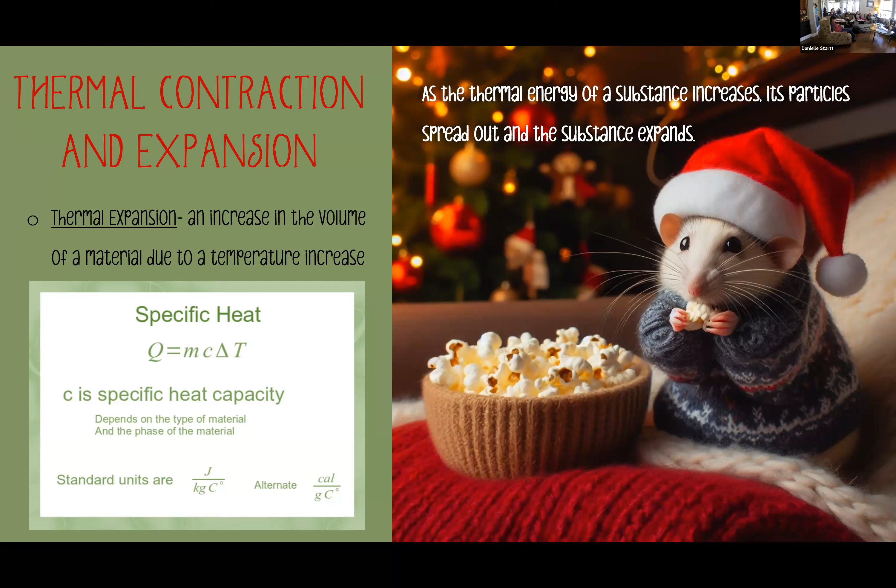So as you heat something up, it's going to spread out and expand, except water when it freezes, which expands because it's forming a crystalline structure as the molecules lock into place. Thermal expansion is an increase in the volume of material due to a temperature increase. Matter expands when heated, which is what makes the liquid in thermometers rise, which you saw today.

It's also the reason for joints in the highway. When you're driving down the interstate and your car goes over those rubber dividers in the highway, those are joints. When they make interstate pavement, they make it in sections divided with little rubber strips, because the concrete expands when it's hot and expands into the rubber instead of cracking.

Is your question whether that's why sidewalks also have divots in them? Yeah, sidewalks are divided for the same reason, also because it's easier to pour them in smaller chunks. If you've ever poured any large concrete, your driveway has sections in it too, because concrete expands and is very rigid. When concrete expands against concrete, it cracks, and we don't want our interstates to crack because they cost billions of dollars. So one way we prevent that is with these little rubbery joints.

Thermal expansion is also used in, what is he standing next to? Not thermometers—what's this thing called on the wall? A thermostat.

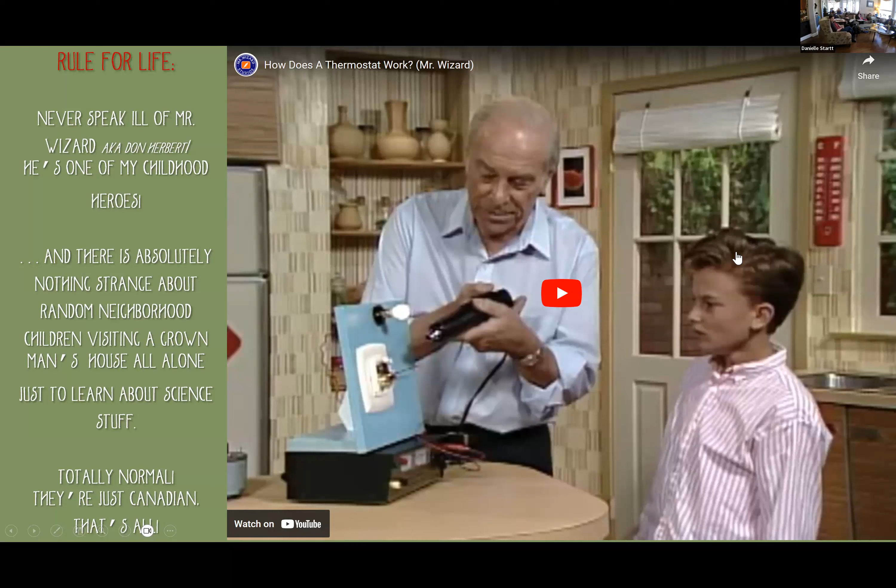So we will watch Mr. Wizard and this random neighborhood child. If I have the full series on DVD, if you ever want to borrow it, it's awesome, but you can watch them on YouTube. I'll tell you what, this is legit how it worked—it wasn't like y'all come over and do science, it was like some random kid hanging out with Mr. Wizard, and he goes, let me show you how this works, does a science experiment, and they go wow, and they go home, and there are different random kids there next week. Totally normal, it was the early 80s, you could get away with this. Okay, so he is going to show us how a thermostat works, and it's really quite cool.

You would recognize this, I assume, right? Yeah, it's a thermostat that you put in your house to measure the temperature and the heat—it not only measures it, because there's a little thermometer in here, but it actually turns the furnace on and off, right? Yeah. Well, you and I are going to investigate what goes inside there, and it's based on the idea of a bimetal strip. Bimetal, meaning—you know what 'bi' means? It means two, right, two metals. In fact, here are two metals right in front of you—there are two wires made of metal, and I'm going to send electric current through them to heat them up. Okay, heat it up and sight right across those wires on top there, and watch what happens when we heat up the two different metals.

What's that? The one in the front is sinking down, making that go down. Now watch, I'm gonna turn off the current.

Go back up again? Yeah, right back up to the same level. As it cools off, it'll go back up to the same height as the other. In other words, what I did this for was to show you that metals expand, but different metals expand at different rates. Obviously, the one on the front expanded the most.

Okay, now let's assume I'm right over here, and light the candle. Let's assume that we take two metals and put them together to form one strip, which is what this is. And light the candle.

All right, so when we're dealing with temperature, we measure it with different scales, and each scale has a purpose. They're not all the same, and they have obvious differences. So what do we use mostly here? Fahrenheit. And what do we use in science? Celsius. Now, Kelvin is used a lot.

Bye, have a safe trip. Oh, sorry. Later.

Kelvin is used a lot in physics, and that's because of the zero. Yes, the ideal gas law. Very good. So Fahrenheit is used most commonly in the US. Water freezes at 32 and boils at 212.

Those are numbers everybody can remember, right? No. What? Celsius is nice and easy: 100, 0, everything in between is a nice even divide, right? And then you get Kelvin, which is used a lot in physics. Water freezes at 273.15 and boils at 373.15. But Kelvin has a difference.

0 Kelvin is theoretical, and it's where all particles stop moving. So think back to the definition of temperature being the average of the kinetic energy of all the particles within a substance, okay?

What happens at 0 Kelvin as all the particles stop moving, right? But if you can get to 0 Kelvin, if it's the average kinetic energy, then you're saying there is no more kinetic energy. It's gone because there's no motion, right? But that's impossible because you can't create or destroy energy. So that's where you get yourself into those little things. So it's a theoretical thing.

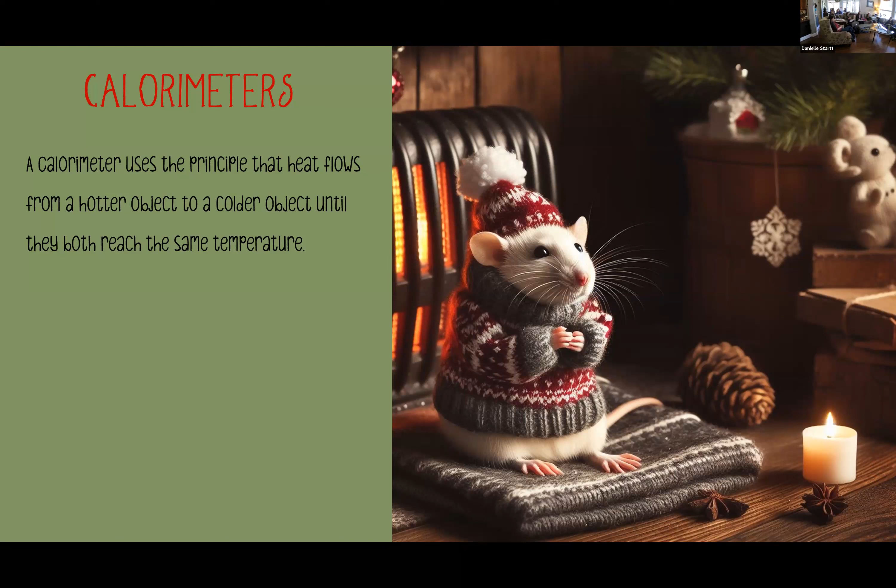So they can estimate, depending on external environmental factors, how long somebody's been dead. And we use this to heat up all kinds of materials, and everything is just kind of a given thing. We think of it as a given thing, but it's actually a thermodynamic law.

So heat and thermodynamics, this looks like where you want to spend your morning with a cup of hot chocolate. I want to stay there. Heck yes. So thermal energy and states of matter. I did this one just for you.

So all matter on Earth exists in 3 states that we know of: solid, liquid, gas, and then plasma being a 4th state that's not stable to exist typically here. We don't see plasma in our day-to-day life, but we do see solid, liquid, gas, right?

So physical change from one state to another is called a what? This is an easy one. What you got, Yusuf? Change of state. Yep, sometimes you'll hear phase, but yeah, change of state.

So matter will change from one state to another if thermal energy is absorbed or released. Okay, picture an ice cube in your hand. As you hold the ice cube, what's gonna happen to it? It's gonna melt. Okay, why is it melting?

This is the heat from your hand. Okay, so the heat from your hand, we know that heat flows from warmer to cooler. So the heat is leaving your hand, and how is your hand feeling? Cold. The heat is leaving your hand, it's going to the ice cube. What's the ice cube doing, absorbing or releasing thermal energy? Absorbing thermal energy, right? Because it's absorbing the thermal energy, it is changing state from solid to liquid.

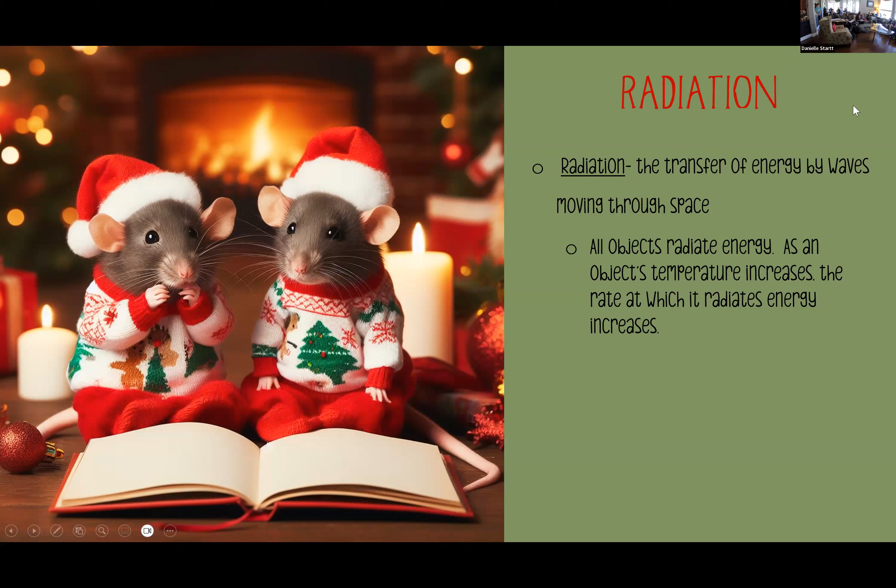So if you ever look over a fire or anything hot and see the air above it gets distorted, all wiggly, you can actually see the effect of the waves on that gas. The light is getting distorted as it passes through due to the change in density for those different areas of heat waves. So that's where you get radiation.

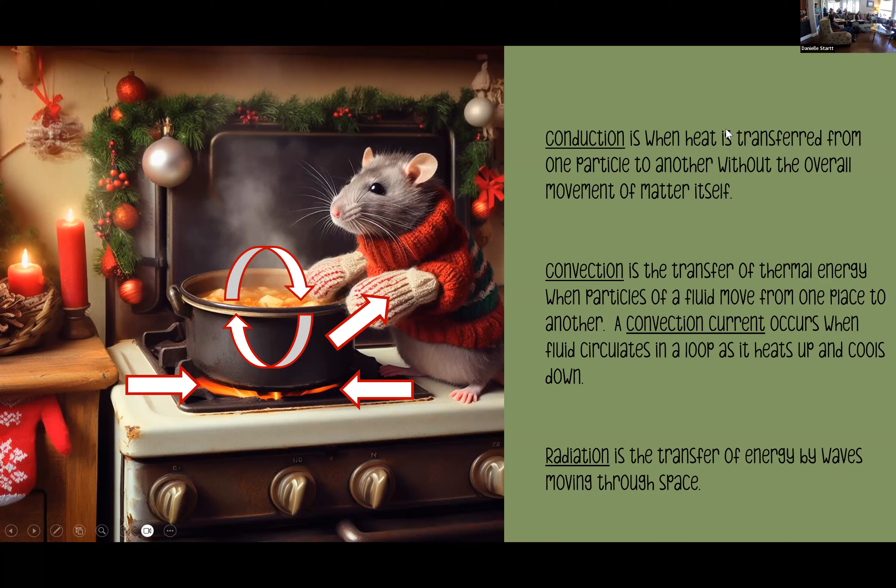All right, so thermodynamics. This is one of those things juniors will not know jack about, and they'll look at you like you're crazy. So we have the study of conversions between thermal energy and other forms of energy, and we call it... Colin?

We call it thermodynamics. This is nerdy stuff. If you want to really get into thermodynamics, there are people who spend their lives on this and talk about getting into your geek. This is the way to do it.

So what's the first law of thermodynamics say? Energy is conserved. This goes back to just a minute ago, we talked about conduction, and we said that you're passing the thermal energy from one particle to another, but you're not losing it, you're just passing it along.

What's the second law state? The energy can't flow from cold objects to hot - colder to hotter. And it's done. It only works on the system you're in. You always have to remember you're talking about the system you're in.

Now what's this last one? Third law of thermodynamics. We talked about that, right? Absolute zero can't be reached because that would mean what happened? You can't destroy energy, because energy's got to go somewhere. You can't make it go away. So it's a theoretical thing.

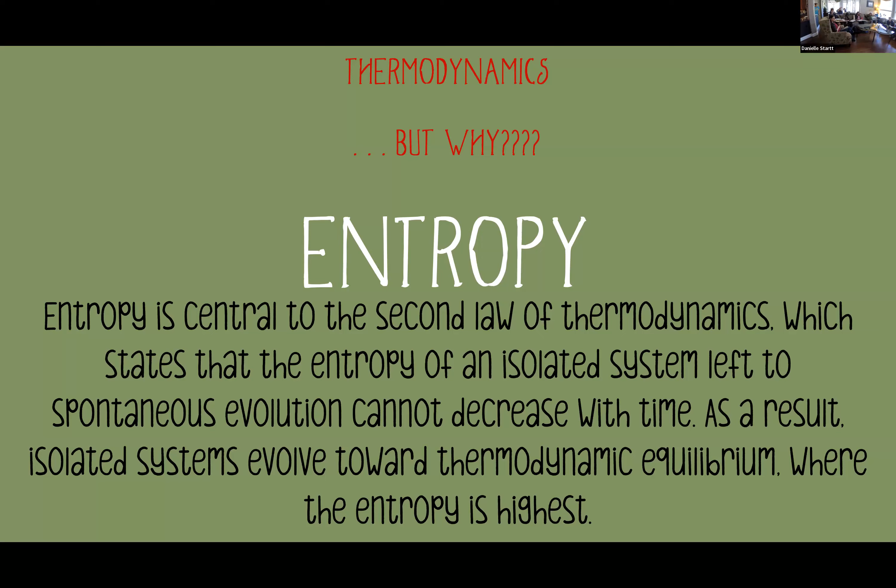Okay, here's entropy and why entropy is useful.

There's a concept that's crucial to chemistry and physics. It helps explain why physical processes go one way and not the other - why ice melts, why cream spreads in coffee, why air leaks out of a punctured tire. It's entropy, and it's notoriously difficult to wrap our heads around.

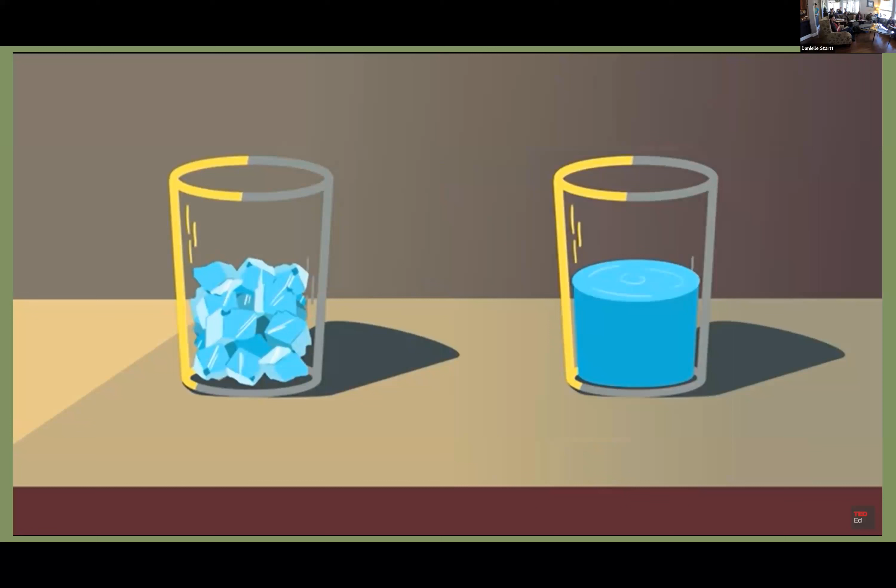Entropy is often described as a measurement of disorder. That's a convenient image, but it's unfortunately misleading. For example, which is more disordered, a cup of crushed ice or a glass of room temperature water? Most people would say the ice, but that actually has lower entropy.

So here's another way of thinking about it, through probability. This may be trickier to understand, but take the time to internalize it, and you'll have a much better understanding of entropy. Consider two small solids, which are comprised of 6 atomic bonds each. In this model, the energy in each solid is stored in the bonds. Those can be thought of as simple containers, which can hold indivisible units of energy, known as quanta. The more energy a solid has, the hotter it is.

It turns out that there are numerous ways that the energy can be distributed in the two solids and still have the same total energy in each. Each of these options is called a microstate. For 6 quanta of energy in solid A and 2 in solid B, there are 9,702 microstates.

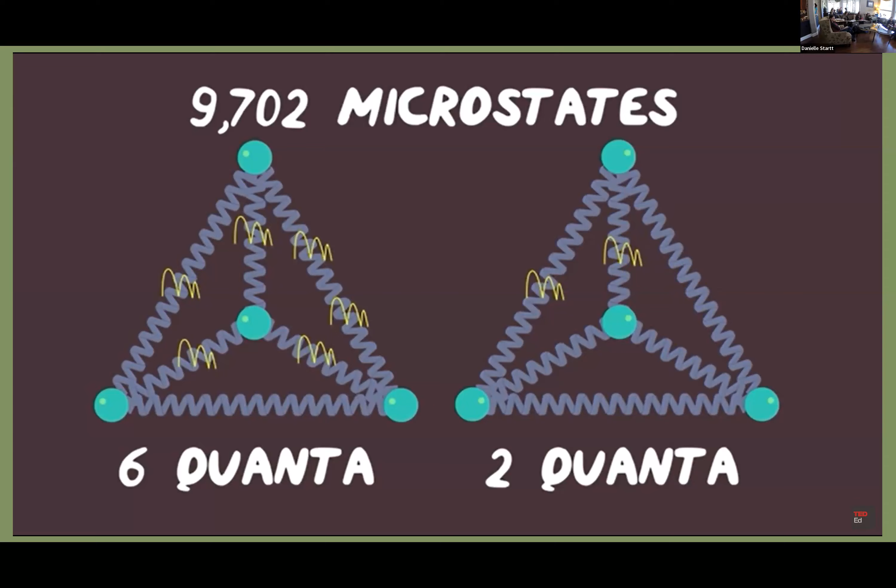Of course, there are other ways our 8 quanta of energy can be arranged. For example, all of the energy could be in solid A and none in B, or half in A and half in B. If we assume that each microstate is equally likely, we can see that some energy configurations have a higher probability of occurring than others.

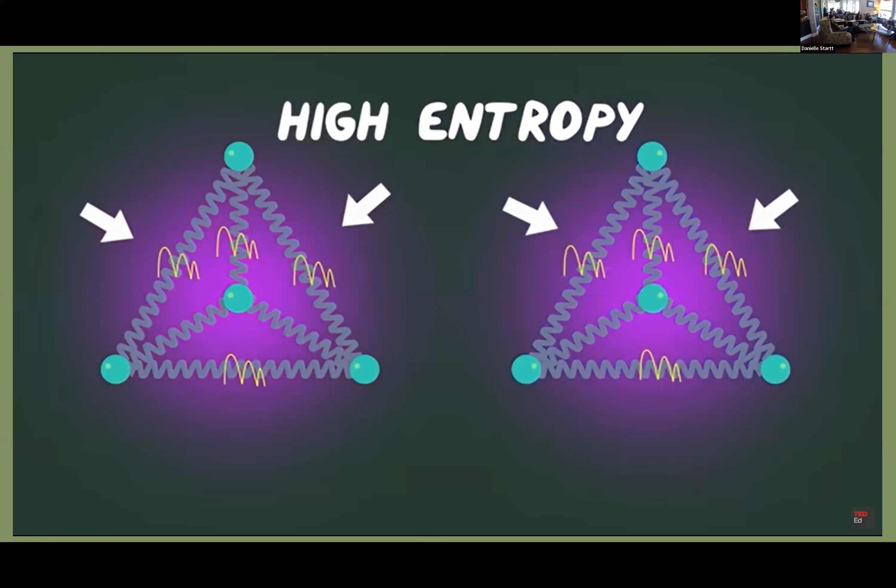That's due to their greater number of microstates. Entropy is a direct measure of each energy configuration's probability. What we see is that the energy configuration in which the energy is most spread out between the solids has the highest entropy. So in a general sense, entropy can be thought of as a measurement of this energy spread. Low entropy means the energy is concentrated. High entropy means it's spread out.

To see why entropy is useful for explaining spontaneous processes like hot objects cooling down, we need to look at a dynamic system where the energy moves. In reality, energy doesn't stay put. It continuously moves between neighboring bonds. As the energy moves, the energy configuration can change.

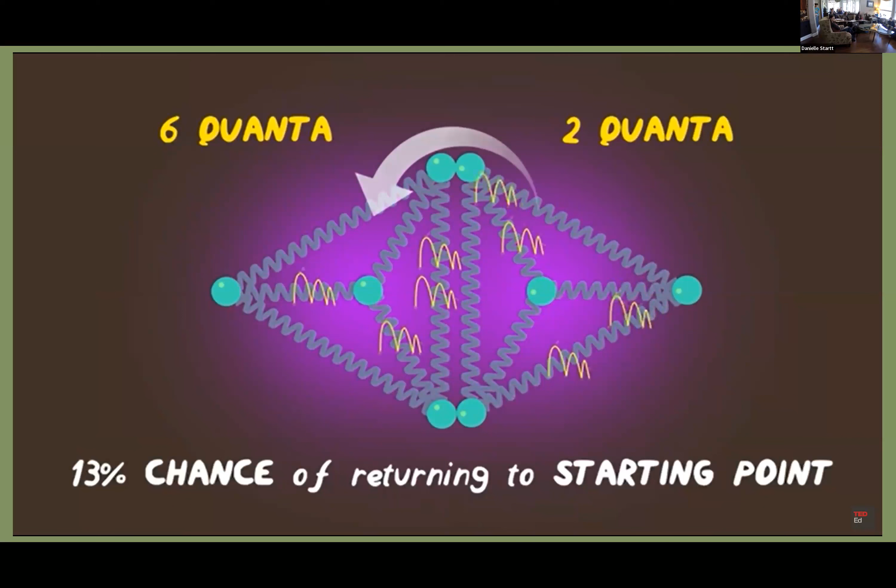Because of the distribution of microstates, there's a 21% chance that the system will later be in the configuration in which the energy is maximally spread out. There's a 13% chance that it'll return to its starting point, and an 8% chance that A will actually gain energy. Again, we see that because there are more ways to have dispersed energy and high entropy than concentrated energy, the energy tends to spread out.

That's why if you put a hot object next to a cold one, the cold one will warm up and the hot one will cool down. But even in that example, there is an 8% chance that the hot object would get hotter. Why doesn't this ever happen in real life?

It's all about the size of the system. Our hypothetical solids only had 6 bonds each. Let's scale the solids up to 6,000 bonds and 8,000 units of energy, and again start the system with 3/4 of the energy in A and 1/4 in B. Now we find that the chance of A spontaneously acquiring more energy is this tiny number. Familiar everyday objects have many, many times more particles than this. The chance of a hot object in the real world getting hotter is so absurdly small, it just never happens.

Ice melts, cream mixes in, and tires deflate because these states have more dispersed energy than the originals. There's no mysterious force nudging the system towards higher entropy. It's just that higher entropy is always statistically more likely. That's why entropy has been called time's arrow. If energy has the opportunity to spread out, it will.

It would just explode, I don't know. I think you got superpowers for a moment. My brain hurts. Okay, so you kind of got that idea. You won't be able to learn anything else. Energy likes to evenly spread itself. Okay, but yeah, there's a nice chance that someone watching this, objects could explode or get even hotter. Infinitesimally small chance, yeah. So if you're ever sitting around and that happens, I expect the aliens have arrived or something, because that's not a good sign. So yeah, not a good sign, Armageddon. So you kind of got it, but you don't have it, because there's also, of course, a what if, a but wait. There's a but wait with entropy.

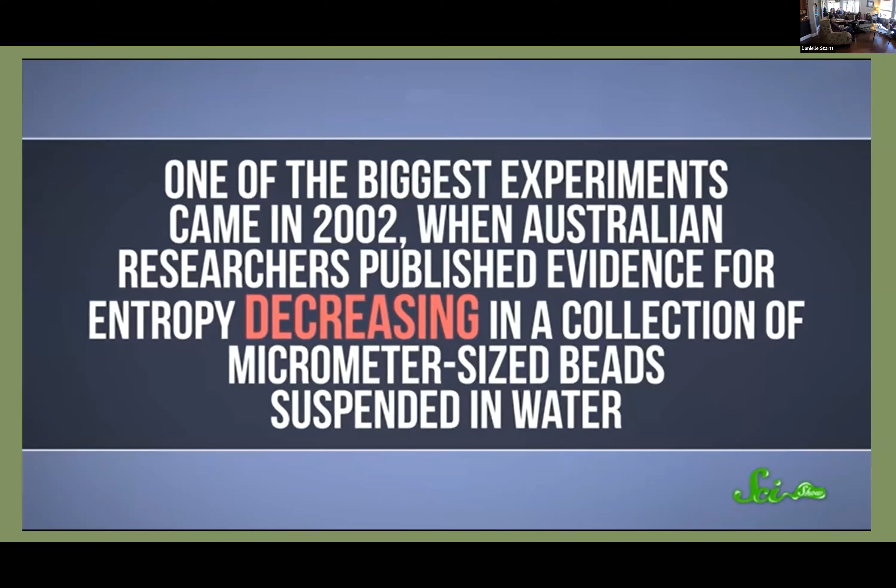One of the biggest experiments came in 2002, when Australian researchers published evidence for entropy decreasing in a collection of micrometer-sized beads suspended in water. The random thermal jiggling of water molecules was constantly pushing the beads around, and for the most part, as expected, the beads were moved randomly. But then the researchers looked harder, and found that sometimes, by pure chance, the beads were pushed in a specific direction, causing them to noticeably speed up. In other words, the beads were turning the disordered random heat energy of water into ordered kinetic energy that can do work. And it was all for free. This effect only persisted for a few tenths of a second, but it proves that on a small scale, you can cheat the system, at least briefly.

This wasn't the only paper to investigate this idea either. There was another in 2005 that suggested these effects might be present in photosynthesis, and a few more from 2013 and 2016 that explored how this might apply on the quantum level. So it's something researchers are actively exploring. While this might sound like a random technical detail, these studies are actually really significant, because as nanotechnology continues to develop, we're going to be building things like engines and transistors on these smaller and smaller scales.

Realistically, this loophole in the second law doesn't mean we'll be able to make a bunch of tiny 100% efficient engines or anything, but it does mean they might sometimes pick up energy from their environment, or their molecules might move differently than expected. And that's definitely important for us to know. The rules developed back in the 1800s will have to be rethought to control things at these tiny scales. Otherwise, we might be in for some surprises.

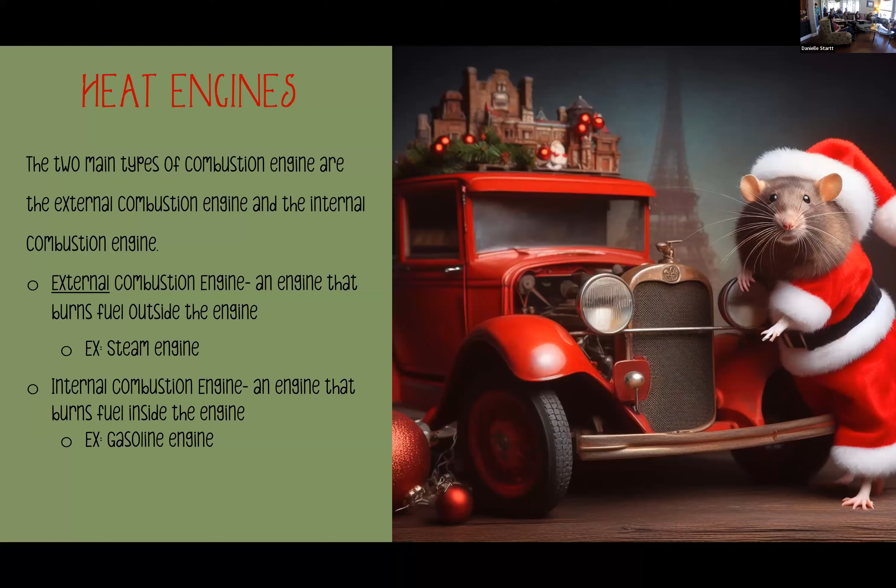We're going to do a little demo on internal combustion engines at the end of this, and it'll be a fun way to wrap up the semester because it's kind of cool. This is what you're dealing with in vehicles on the road today. That's what you put the gasoline in, and it functions inside the cylinder. We'll come back to that in a few minutes. But let's look at this.

So what do you call a system in a house that heats many rooms from a central location? Air conditioning cools it off, and this heats it up. Furnace is what heats it up? Central heating. Okay, that's what we're looking for.

So most of you probably have forced air in your house. Do you have vents? You turn the thermostat and it blows. Okay, that's forced air, that's what most of us have. Some houses, older houses, usually from the 30s, 40s, 50s, 60s, tend to have baseboard heat.

Anybody ever get in a car with your mom or dad, or even yourself if you're driving now, and it's frosty outside, and they turn on the rear defrosters, and there are those tiny lines that run through the glass and suddenly the frost disappears? Those are wires with a tiny amount of heat, just enough to get it above freezing, otherwise you crack it. Yeah, barely, just a little bit of heat.

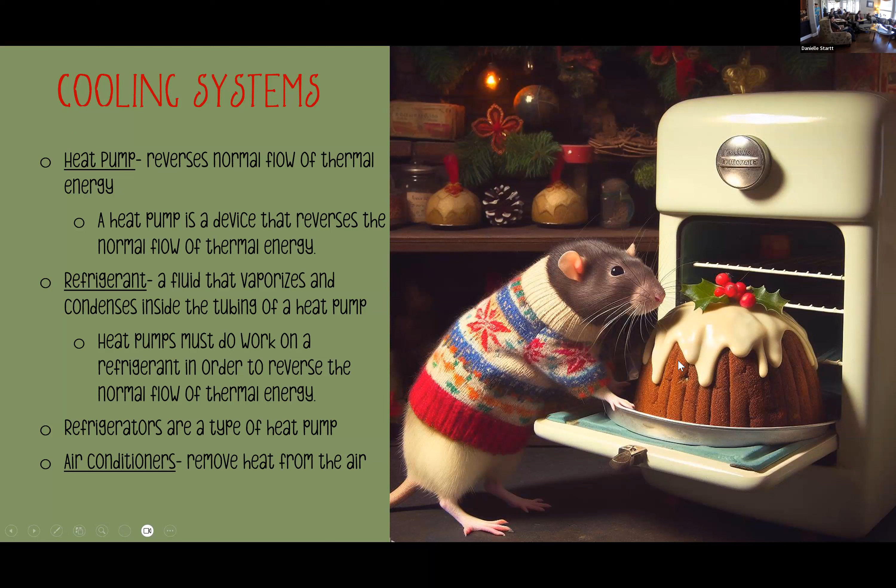Yes, you operate that oven? Don't know. Yes. Is he really planning to eat all of that? Yes, it's a fridge. All right.

Now I'm going to show you these, and then we're going to go outside and do our little experiment. But these are your topics for your Unit 4 and 5 tests.

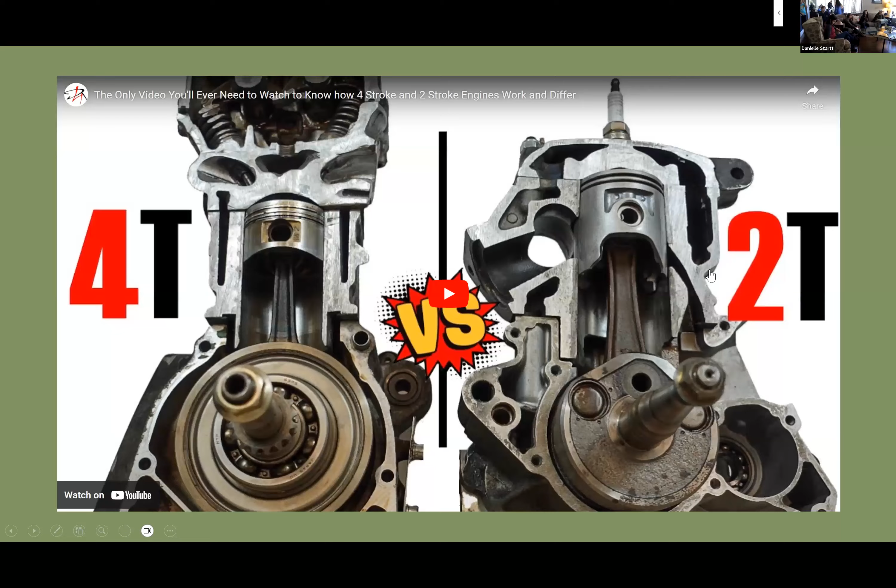Stop acting crazy, wait - buffer. What is the deal? Let me do this, I'll put it straight into YouTube so it doesn't get stupid for me like that. There, that's convection for you by the way - that's video Jason gets of the river in the mornings, it's pretty cool, it's kind of mesmerizing.

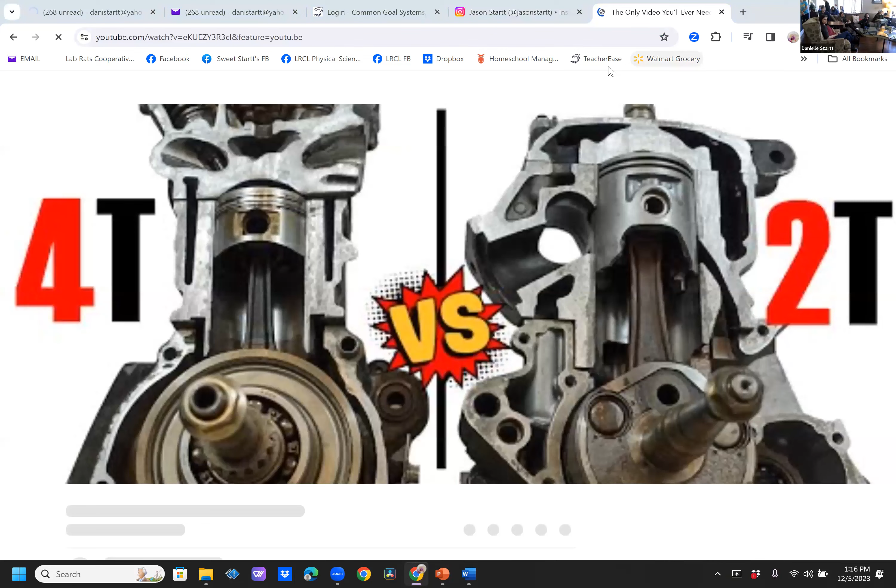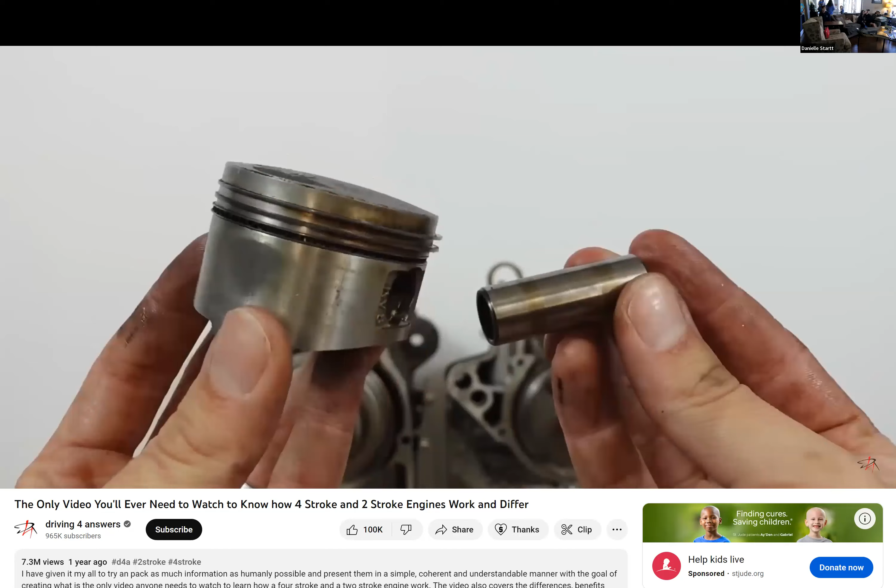All right, there we go - here we have a 4-stroke engine, and here we have a 2-stroke engine. At first glance they seem very simple - they both have a crank, a conrod, as well as a piston, and they both have a cylinder. They both operate by converting the reciprocation of the piston into the rotation of the crankshaft, which then turns the gears of the transmission and ultimately the wheels of the vehicle. But beyond these core similarities, the 4-stroke and the 2-stroke start to fundamentally diverge, resulting in two very different approaches to internal combustion.

What I'm going to do today is give you the only video you need to watch to get a very solid understanding of how a 4-stroke and a 2-stroke engine work. We'll also be exploring the differences, benefits, and drawbacks of each engine type, and this will answer the question of why the 4-stroke ultimately prevailed over the 2-stroke in most applications, despite being larger, heavier, more expensive, and more complex. So let's get started with the 4-stroke.

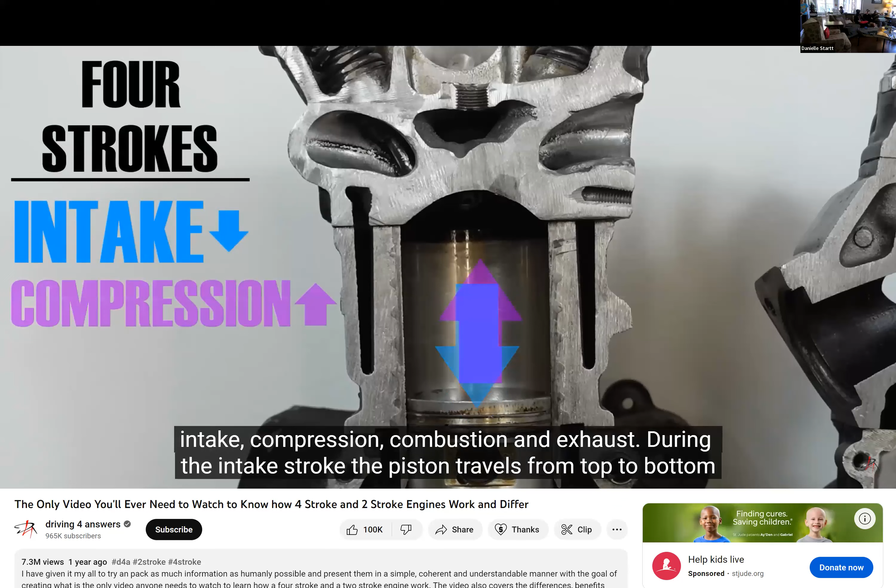Why is it called a 4-stroke? It's because the 4-stroke engine needs 4 strokes to complete one combustion cycle. Every time the piston moves from top to bottom, or vice versa, that's 1 stroke - equal to 180 degrees of crankshaft rotation. The 4 strokes are intake, compression, combustion, and exhaust. During the intake stroke, the piston travels from top dead center to bottom dead center, creating an empty space or vacuum inside the cylinder - a brief absence of air.

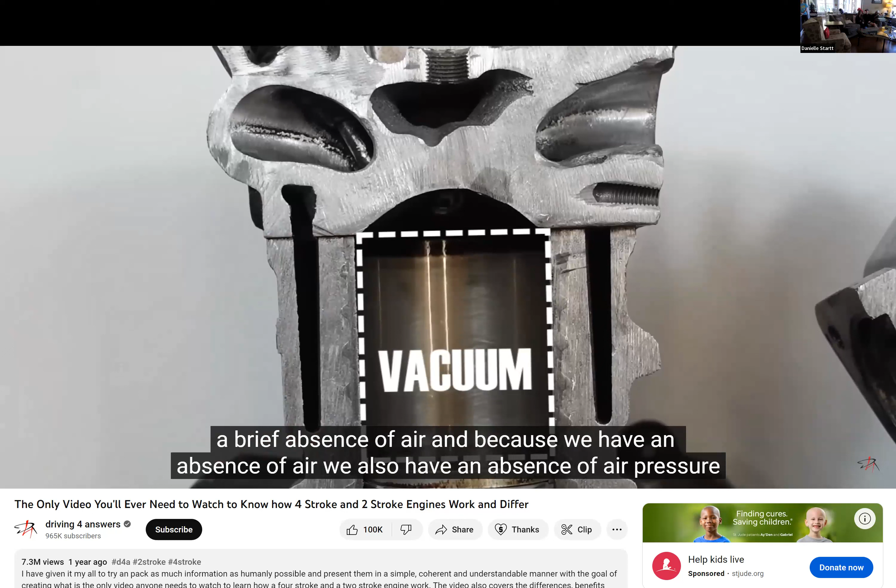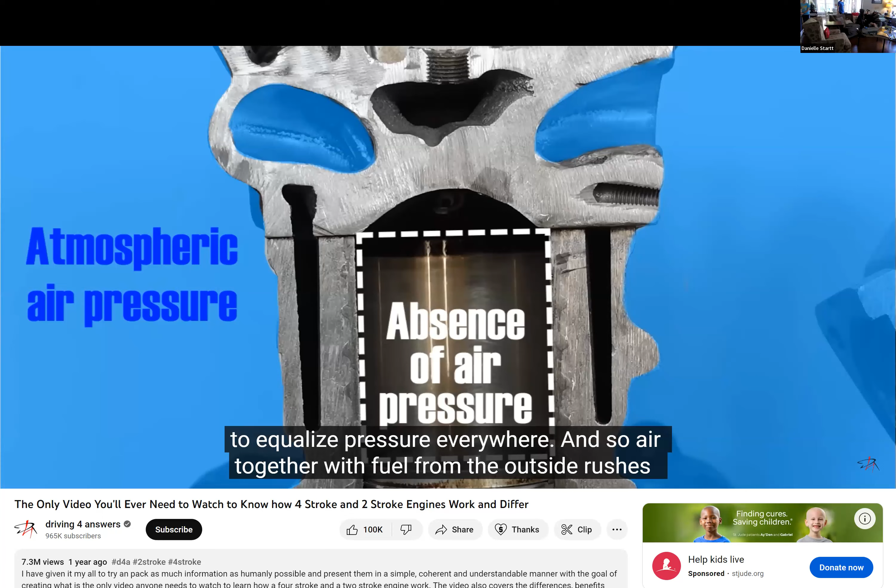Because we have an absence of air, we also have an absence of air pressure. In other words, we have low air pressure inside the cylinder and atmospheric air pressure outside the cylinder. This pressure difference cannot continue to exist, and air naturally seeks to equalize pressure everywhere. So air, together with fuel from the outside, rushes into the cylinder and fills it with a fresh air-fuel mixture. By the time the piston reaches bottom dead center, all the air and fuel that can get in have done so, and the piston now starts to move upward.

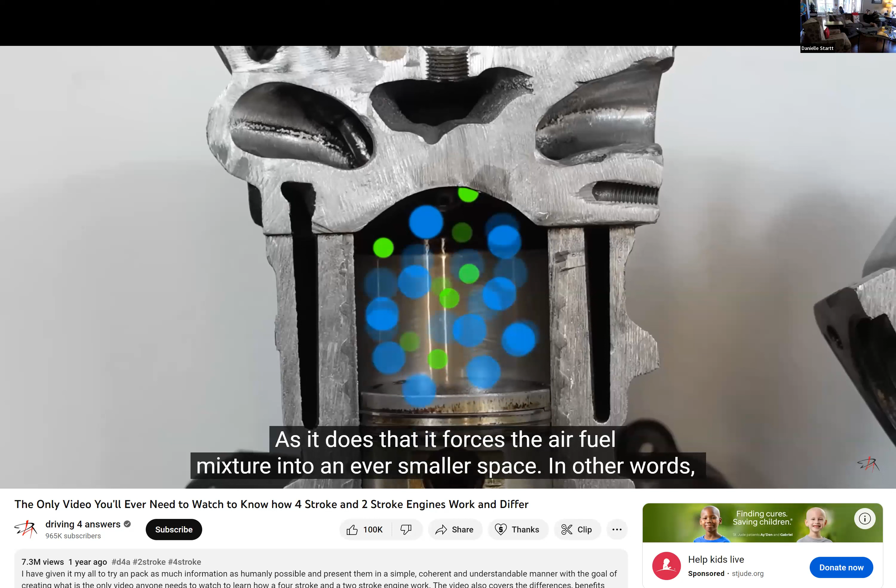As it does that, it forces the air-fuel mixture into an ever smaller space. In other words, it's compressing the air-fuel mixture, which is why this stroke is called the compression stroke. Just before the piston reaches top dead center, the spark plug fires and ignites the air-fuel mixture, which finds itself between the two electrodes of the plug.

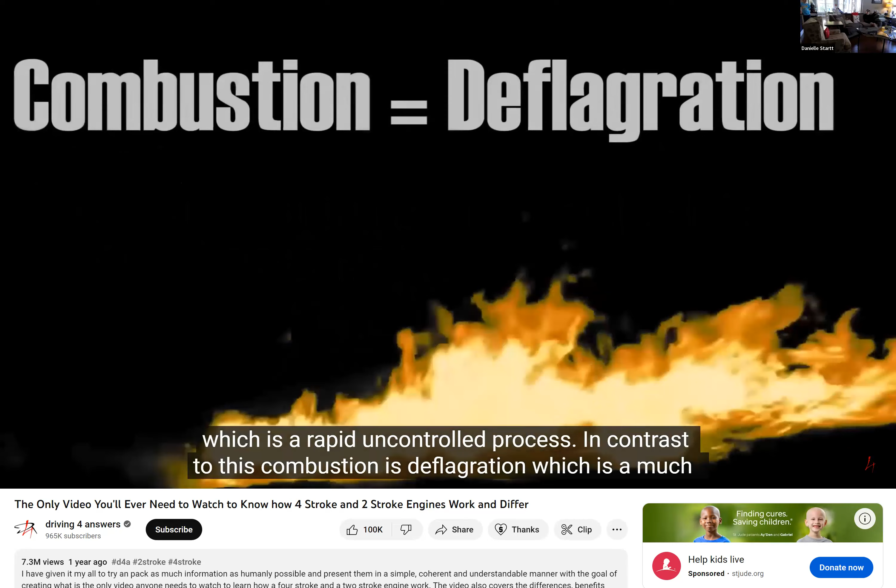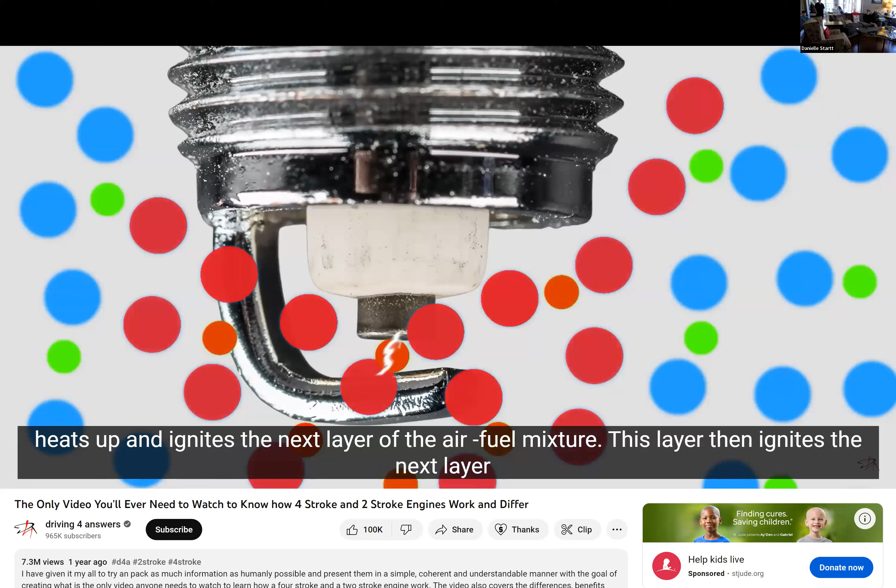Although combustion inside an engine is often described as a bang or explosion, that isn't what's actually happening. An explosion is detonation, which is a rapid, uncontrolled process. In contrast, combustion is deflagration, a much slower, more even, and controlled process. Combustion spreads out evenly outward from the spark plug through heat transfer. The small portion of air-fuel mixture initially ignited by the spark plug heats up and ignites the next layer of the air-fuel mixture. This layer then ignites the next layer, and the process continues until all the air-fuel mixture is burned. As the combustion flame front spreads, it rapidly raises the temperature and pressure inside the cylinder.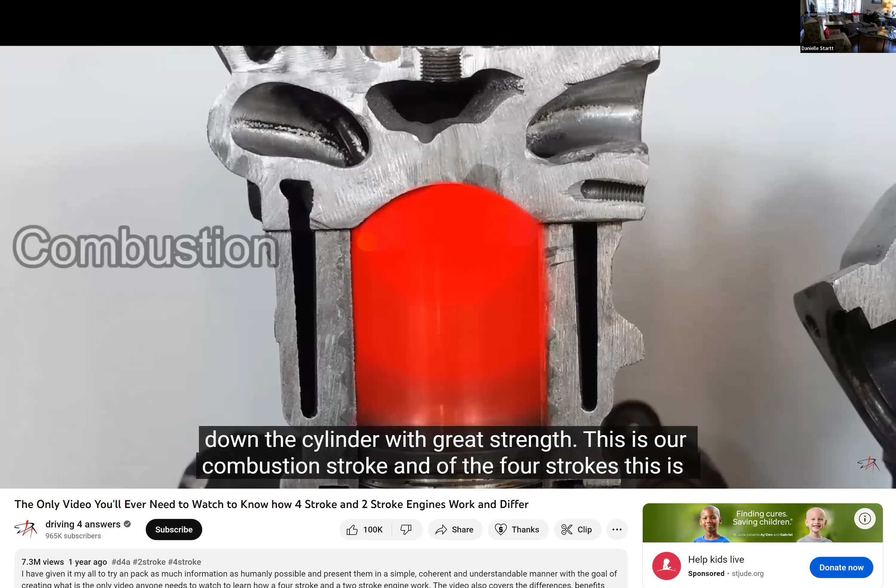Because the cylinder is sealed, this pressure has nowhere else to go, so it ends up pushing the piston down the cylinder with great strength. This is our combustion stroke, and of the 4 strokes, this is the only one that actually generates power. It does so by converting the energy released by combustion into motion of the piston, which then turns the crankshaft and ultimately the wheels.

By the time the piston reaches bottom dead center again, all the air-fuel mixture has been burned, and we now have exhaust gas, or the remains of combustion, inside the cylinder. As the piston moves up once again, the exhaust gases will leave the cylinder and exit through the exhaust piping, catalytic converters, and mufflers out into the atmosphere.

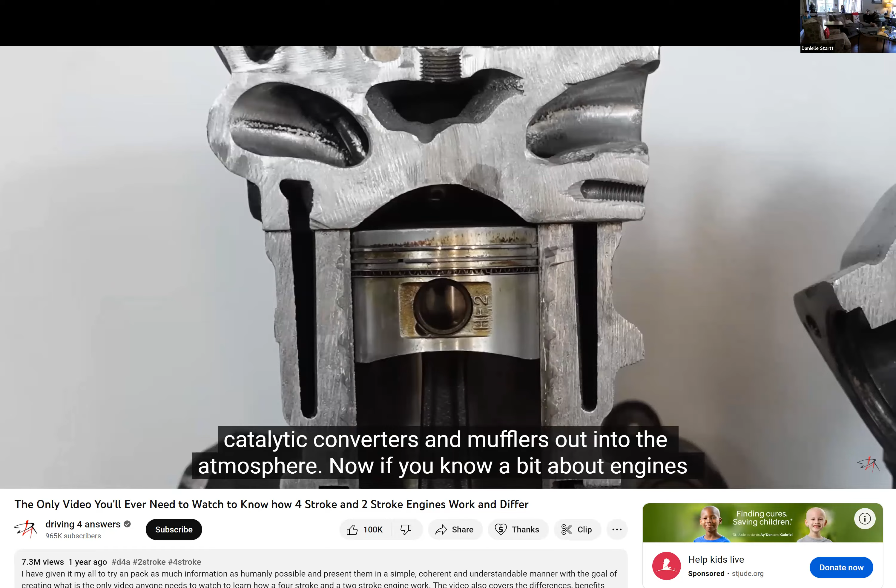Now, if you know a bit about engines, you've probably noticed how my explanation of the 4-stroke combustion cycle fails to answer some very important questions. These are: how do we allow air and fuel to get in during intake? How do we keep air and fuel, as well as combustion energy, from escaping during compression and combustion? And how do we allow exhaust gases out? Well, the answer to all of this is the same thing, and it's valves.

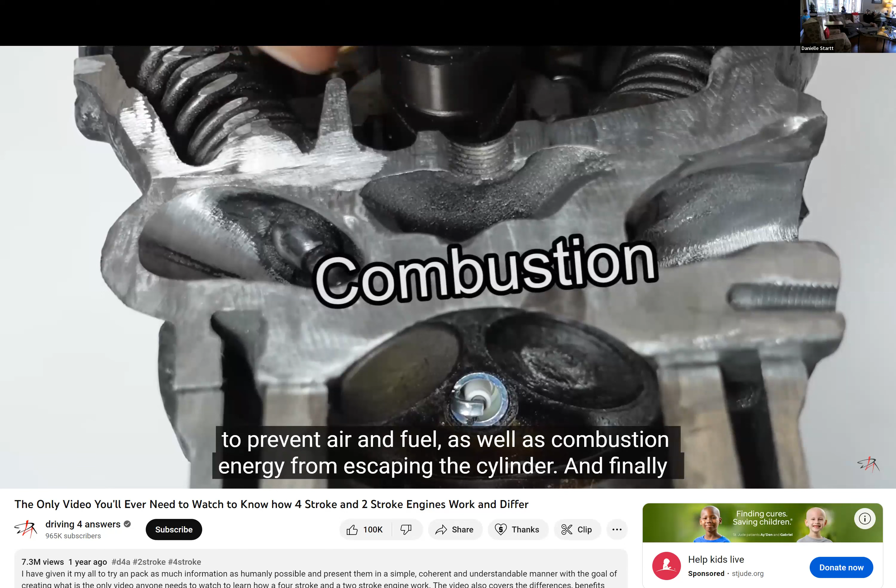The intake valve opens during the intake stroke to allow air and fuel into the cylinder. Both valves are closed during the compression and combustion strokes to prevent air and fuel, as well as combustion energy, from escaping the cylinder. And finally, the exhaust valve opens during the exhaust stroke to allow exhaust gases to escape the cylinder.

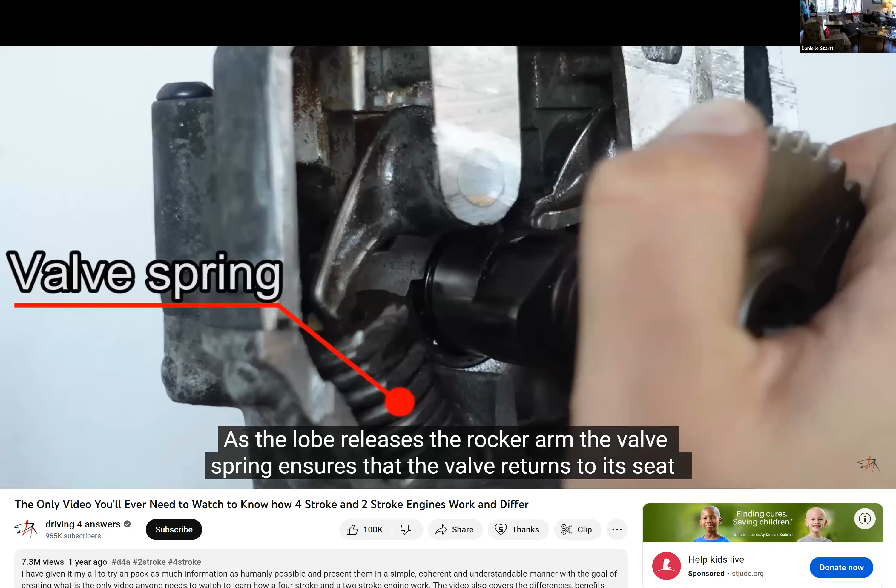Now, the valves are operated by the camshaft, and as you can see, the camshaft has lobes on it. As the lobe contacts the rocker arm, it pushes onto the valve and opens it. As the lobe releases the rocker arm, the valve spring ensures that the valve returns to its seat as soon as possible. The shape of the lobe determines how much the valve opens and how long it remains open.

The higher the lobe, the more the valve opens, or the more lift we have. The broader the lobe, the longer the valve remains open, and the more duration we have. But for the engine to run well, we must ensure that the motion of the camshaft is synchronized to the motion of the crankshaft and the piston.

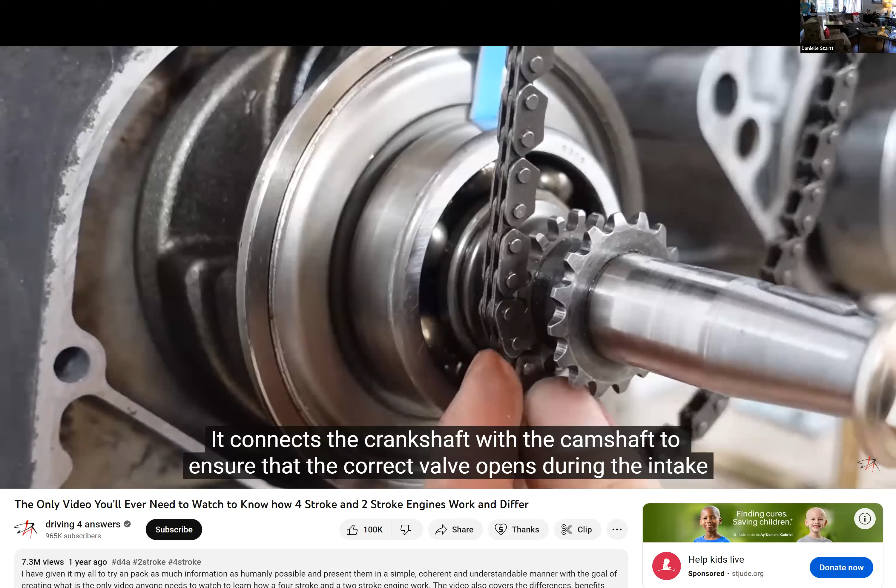This is done by a cam belt or cam chain. It connects the crankshaft with the camshaft to ensure that the correct valve opens during intake, that both remain closed during compression and combustion, and that the correct valve opens during exhaust. As you can see, our chain is very slack, and this is because our display model doesn't have a chain guide and tensioner, which are normally present to ensure proper operation of the chain.

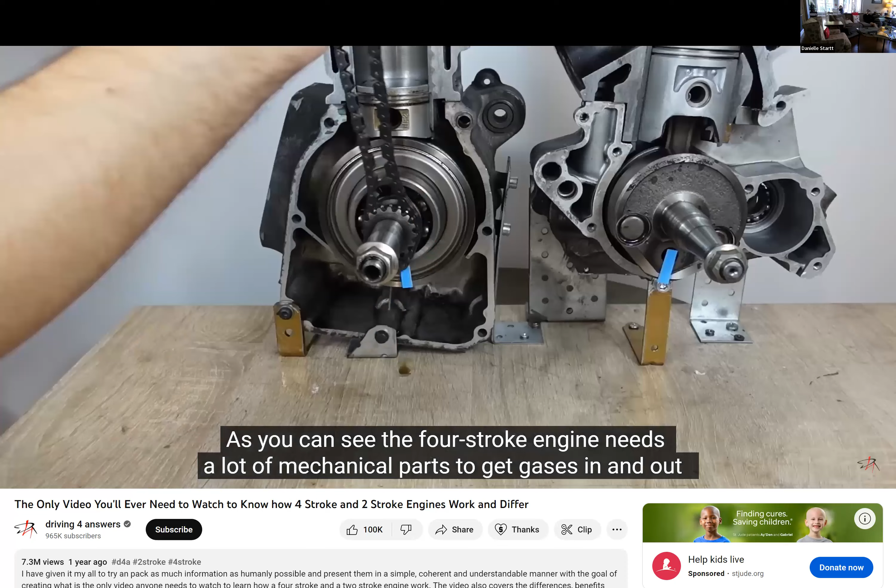As you can see, the 4-stroke engine needs a lot of mechanical parts to get gases in and out of the cylinder. These parts are a source of weight and complexity, but also of friction, and they actually have to steal some of the engine's power to operate.

I need some strength to overcome the resistance of the valve spring and open the valve. This strength must come from somewhere when the engine is running. And so the valves actually steal a bit of the energy created by combustion to open themselves and allow the next combustion to happen.

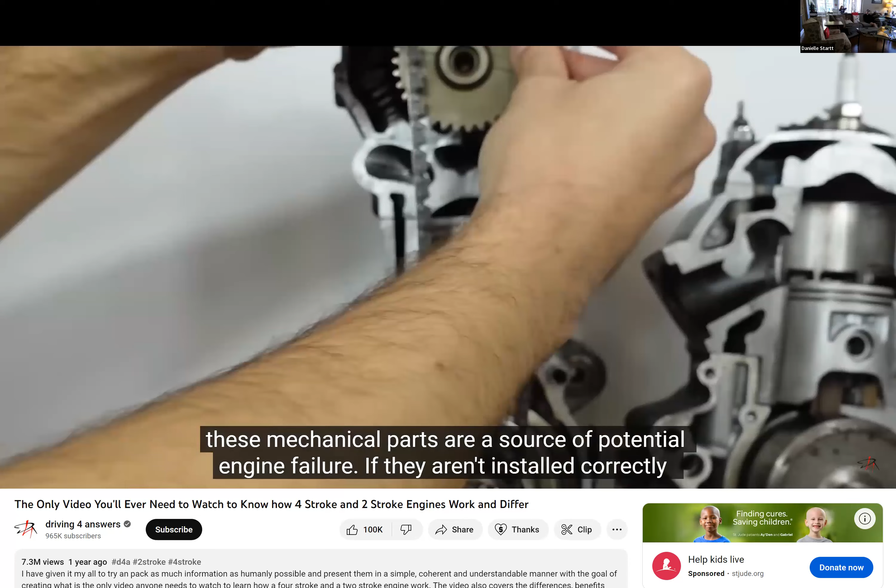Additionally, all of these mechanical parts are a source of potential engine failure. If they aren't installed correctly and the timing of the engine isn't correct, it can result in the engine running poorly. In extreme examples, the timing can be so off that it results in the piston contacting the valve on an interference engine. An interference engine is one where valves and the piston occupy the same space but at different times. This can often enable a more compact, efficient, and powerful engine, but it also leads to engine failure in the event that the chain or belt snaps.

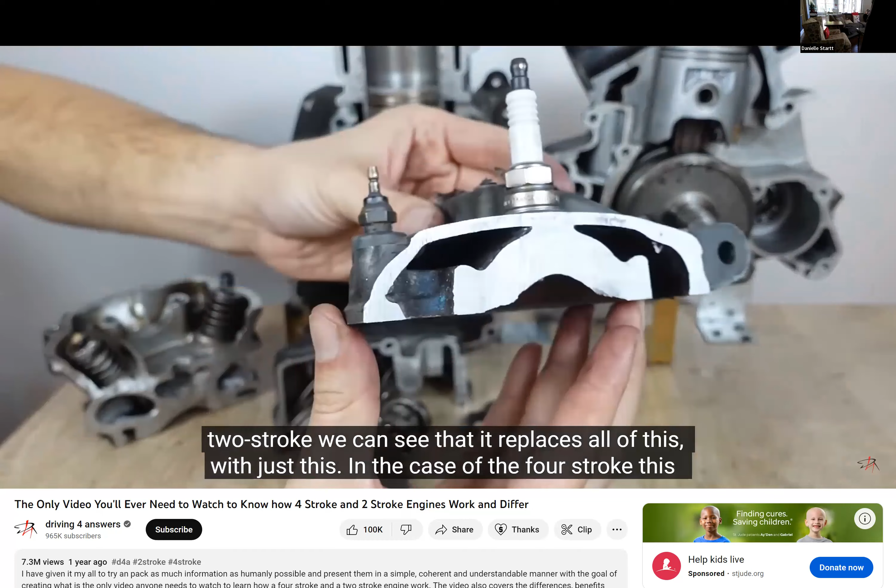Now, if we move over to two-stroke, we can see that it replaces all of this with just this. In the case of the four-stroke, this is the cylinder head together with the valve cover, whereas in the two-stroke, we really have just a cylinder cover or cap. There are zero moving parts, no valves, no chains, no cams, no springs, and therefore less weight, less complexity, less cost, and less potential for failure.

So then how does the two-stroke get gases in and out of the cylinder without valves? Well, if there's one thing you should take away from this video, it's this: the four-stroke only uses the area above the piston for the combustion cycle, whereas the two-stroke uses both the area above and below the piston. In other words, the intake charge, or air and fuel mixture, sees both the area above and below the piston in a two-stroke, whereas the intake charge never gets below the piston in a four-stroke.

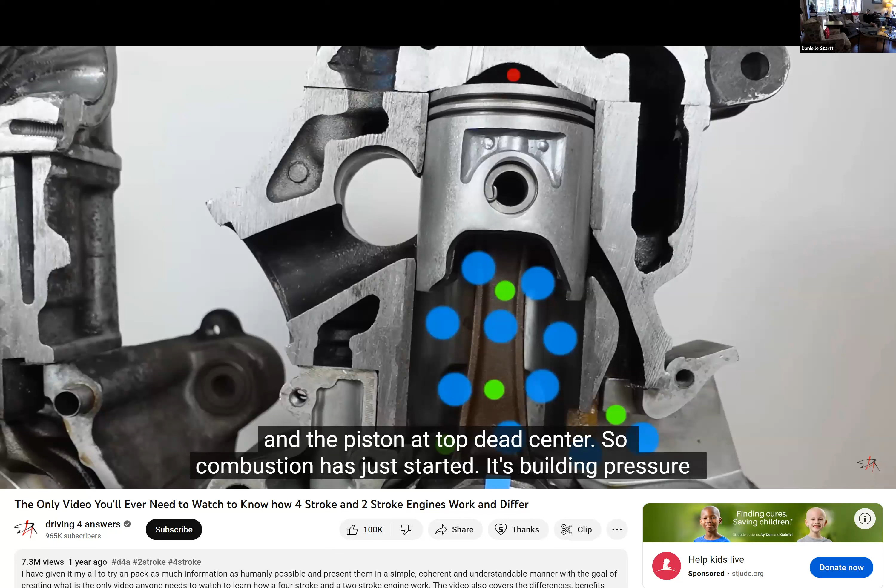Now let's observe the combustion cycle in a two-stroke. We're starting with the combustion stroke itself and the piston at top dead center. So combustion has just started. It's building pressure in the cylinder and pushing the piston down, while at the same time we have fresh air fuel mixture below the piston. I'll explain how it got there in just a moment.

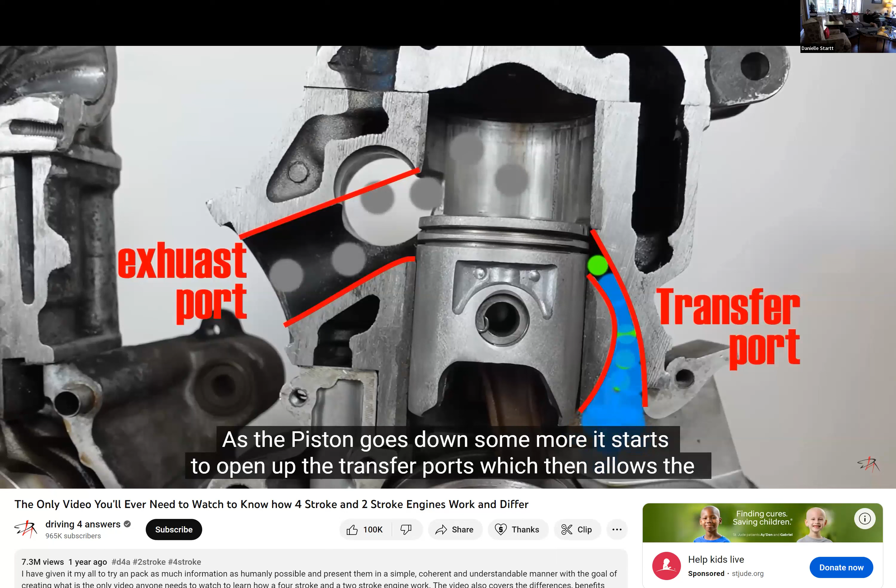Now, as the piston is going down, it opens up the exhaust port, which allows some of the exhaust gas to start escaping from the cylinder. At the same time, the downward motion of the piston is also compressing the air fuel mixture below it and pushes it into the transfer port, which is still blocked up by the piston skirt. As the piston goes down some more, it starts to open up the transfer ports, which then allow the compressed air fuel mixture from below the piston to be transferred above the piston.

The pressure in the cylinder has already decreased substantially because much of the exhaust gas has been allowed to escape through the exhaust port. This means that the compressed air fuel mixture coming out the transfer port is actually at a higher pressure than the remaining exhaust gases in the cylinder, which means that as the air fuel mix enters the cylinder, it helps to push out the last of the remaining exhaust gas.

But as you can see, our exhaust port is still open. It's not blocked up by the piston, which means that the air fuel mixture not only pushes the remaining exhaust gas out of the cylinder, the air fuel mixture itself is also free to exit the cylinder through the exhaust port. This brings us to the first drawback of the two-stroke: the design of the engine means that some fresh, unburned fuel gets dumped out of the exhaust. This, of course, is the definition of inefficiency, but there are ways around it, and we'll cover them in this video.

So the piston is now at bottom dead center, and we have an air fuel mixture above the piston as the piston starts going up. Now, in addition to pushing up and compressing the air fuel mixture, the upward motion of the piston is also drawing more fresh air and fuel into the cylinder. As the piston rises from bottom to top, it creates a vacuum below the piston. Just like in the four-stroke, vacuum is the absence of air which cannot continue to exist.

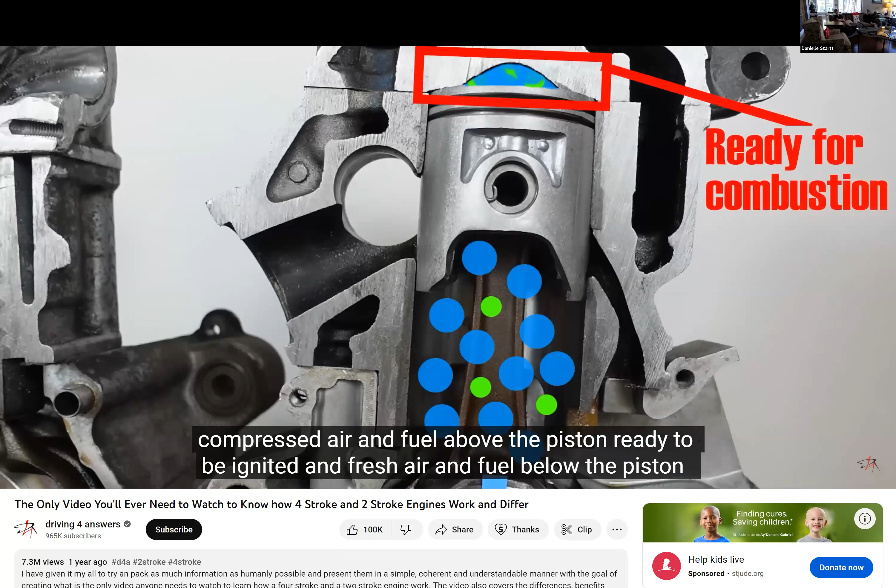And so the air-fuel mixture rushes into the cylinder through the intake port and occupies the area below the piston. When the piston reaches top dead center again, we have compressed air and fuel above the piston, ready to be ignited, and fresh air and fuel below the piston, ready to be pushed into the cylinder when the piston descends again and opens up the transfer port.

The two-stroke combustion cycle and design also explains why the two-stroke piston is much longer than the four-stroke piston. It must be long enough to keep both the transfer and the exhaust port blocked as it travels and approaches top dead center. If the piston were shorter, exhaust gases could enter the area below the piston, but more importantly, the fresh intake charge could also escape out the exhaust port with the piston at top dead center.

Each time the piston is at top dead center, a combustion event occurs. This also explains the name two-stroke: the engine only needs two piston strokes to complete its combustion cycle. In other words, each 360 degrees, or one full engine revolution, results in a combustion event. Whereas in a four-stroke engine, combustion occurs only every other time the piston reaches top dead center - only every 720 degrees of engine rotation.

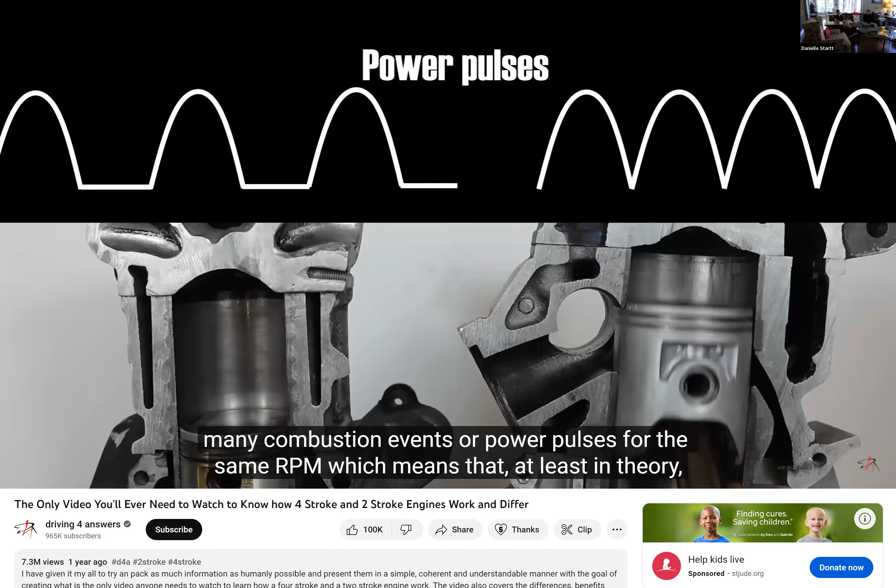This means that the two-stroke produces twice as many combustion events, or power pulses, for the same RPM, which means that in theory, the two-stroke engine can make twice as much power for the same displacement compared to a four-stroke engine.

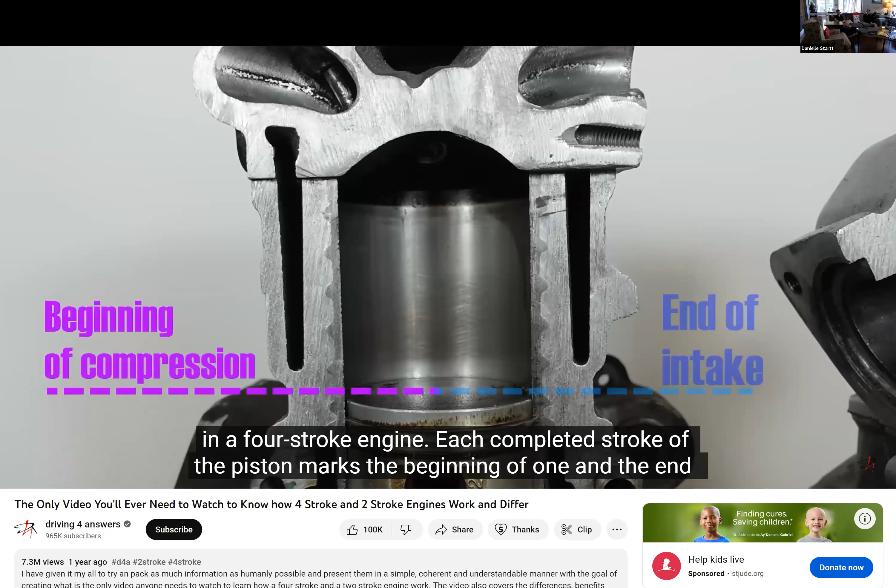The other important thing to note is that the strokes are very clearly defined and separated in a four-stroke engine. Each completed stroke of the piston marks the beginning of one and the end of another stroke of the combustion cycle. But the two-stroke engine sort of lumps the strokes together - they overlap and occur simultaneously. The two-stroke is actually multitasking, which enables it to squeeze more action into the same time.

But as with everything, there is a price to be paid. My explanation of the two-stroke combustion cycle probably raises some questions. For example, what about the intake port - how come the downward motion of the piston doesn't just push the air-fuel mixture back out through the intake? Well, no worries, we're going to answer these questions one by one, and their answers will shed light on the price that the two-stroke paid for its increased combustion frequency.

Let's start with how we prevent air and fuel from going back out the intake when the piston goes down. To do that, many engines use this - a reed valve, which is placed into the intake. A reed valve is essentially a one-way valve: it allows gases to enter, but prevents them from exiting.

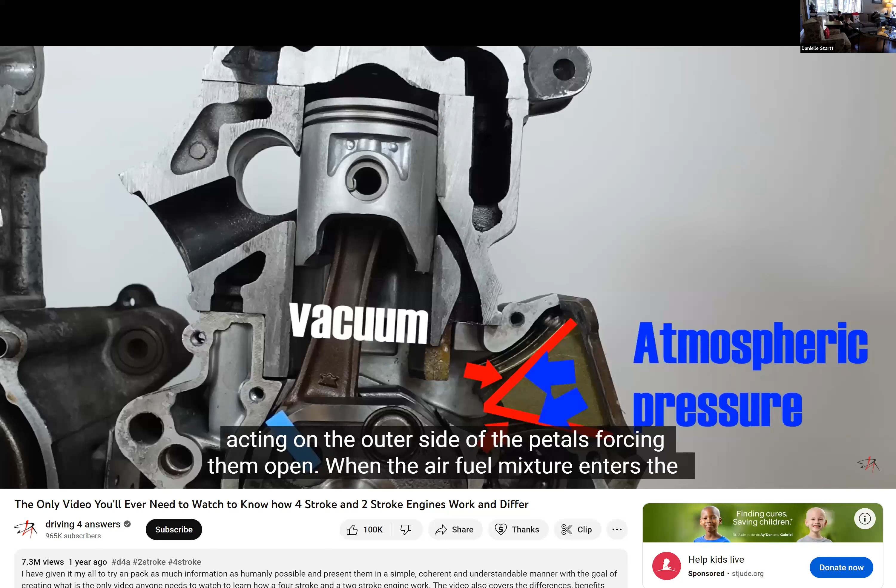When the piston moves up and creates a vacuum inside the crankcase, it also creates a low pressure zone inside the crankcase, while a high pressure zone remains outside in the atmosphere. This pressure difference forces the reed valve blades, or petals, open. Vacuum inside the crankcase means there's very little pressure acting behind the petals, but there's atmospheric pressure acting on the outer side, forcing them open. When the air-fuel mixture enters the crankcase, the pressure soon equalizes.

As the piston starts going down and compressing the air-fuel mixture, pressure actually becomes greater behind the petals on the crankcase side, forcing them shut. The design of the reed valve is such that the petals can only open in one direction, and so crankcase pressure closes the petals and keeps the compressed air-fuel mixture from escaping back into the intake.

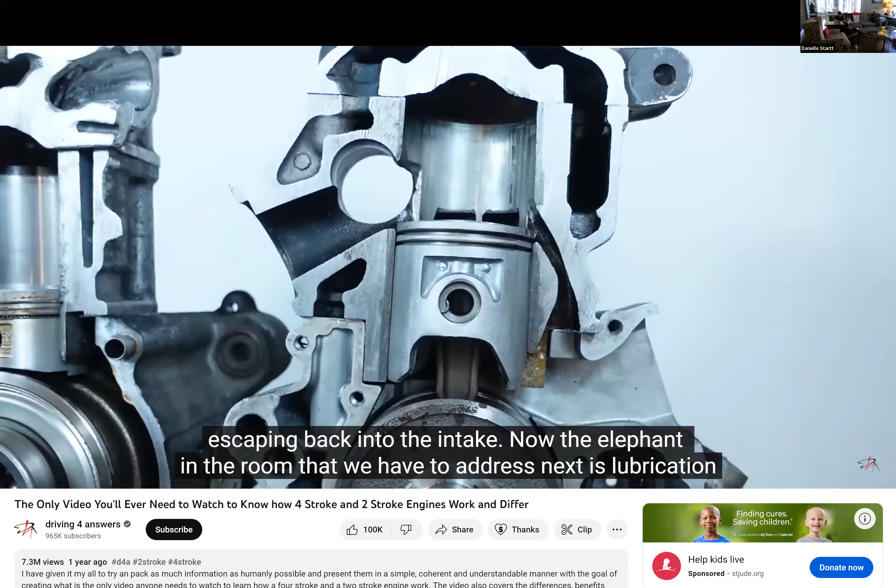Now, the elephant in the room that we have to address next is lubrication. If you have ever owned an engine in any kind of vehicle or appliance, you probably know that lubrication is key for engines. Without the protective film of oil, metal-to-metal contact occurs and quickly leads to catastrophic failure.

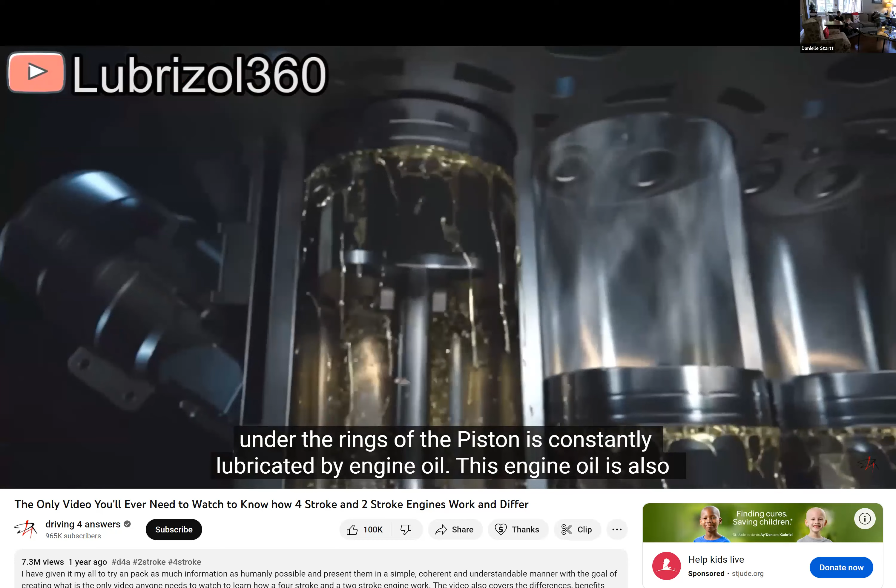As you may know, in a four-stroke engine, everything under the rings of the piston is constantly lubricated by engine oil. This engine oil is also usually circulated, filtered, and pressurized by an oil pump to ensure that the film of oil between metal surfaces is always strong enough to resist all the forces trying to break it apart. So the elephant in the room is the area under the piston inside a two-stroke engine. If this area constantly sees air and fuel, then how do we keep it lubricated? Obviously, getting the same quantity of oil here as in a four-stroke and keeping it circulated is impossible.

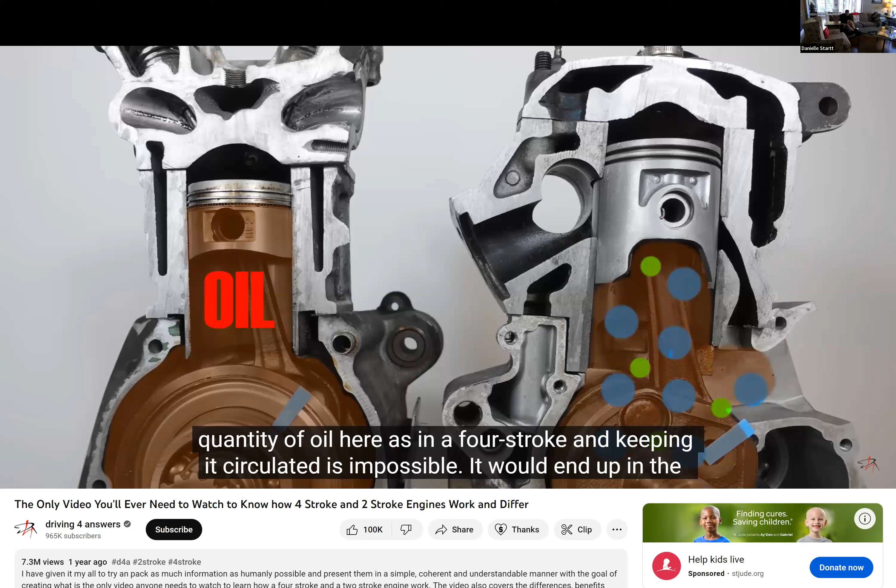It would end up in the combustion chamber and probably prevent combustion from ever occurring. We also know that fuel is a solvent, making things even more difficult for the rotating assembly of the two-stroke. So how do we prevent metal-to-metal contact in a two-stroke? The answer is a compromise. Instead of only getting air and fuel under the piston, we get air, fuel, and oil in here, but we keep the quantity of oil low enough to prevent it from impeding combustion, but high enough to provide some lubrication to the moving parts of the engine.

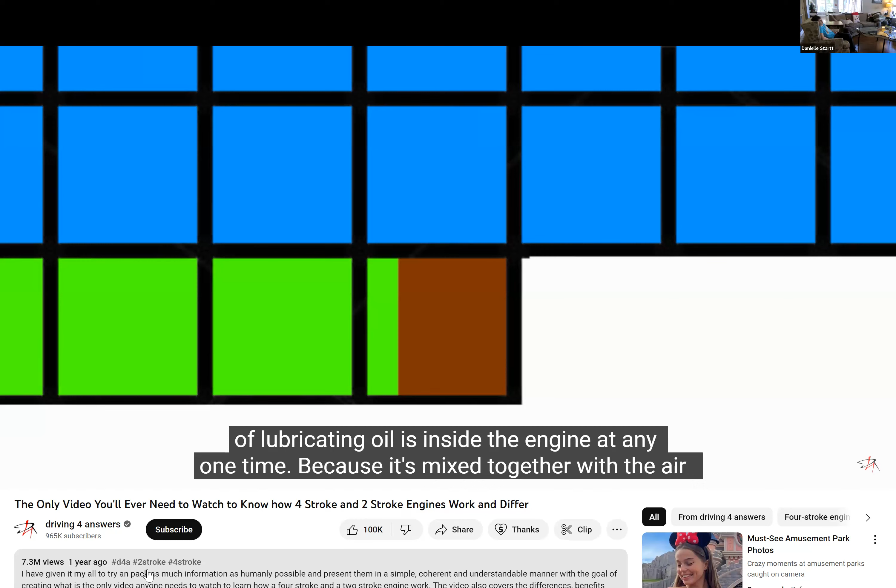Now, the ratio of air to fuel inside the engine is usually somewhere around 13:1, and the ratio of two-stroke oil to fuel is anywhere from 24:1 to 50:1. This gives you an idea of just how minimal the amount of lubricating oil is inside the engine at any one time. Because it's mixed together with the air and fuel, the oil also inevitably ends up inside the combustion chamber where it gets burned.

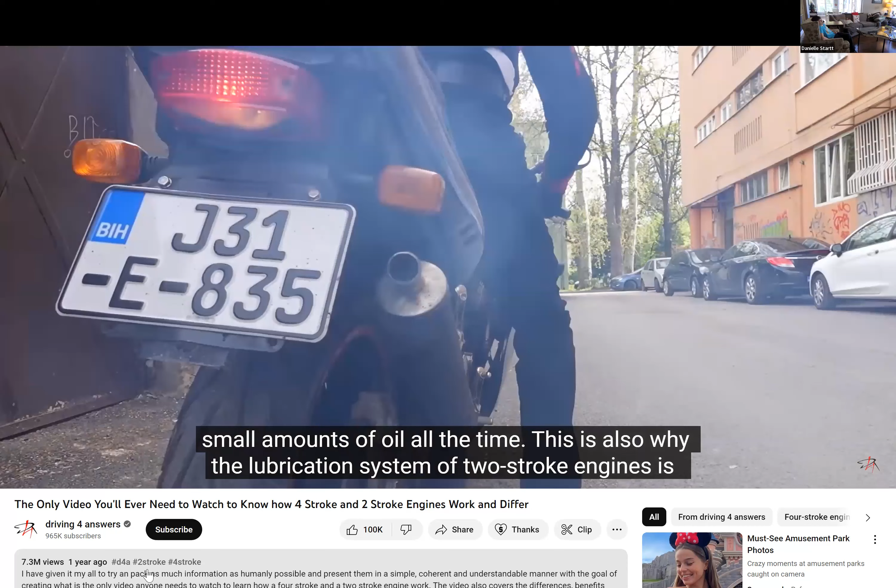This is where the smoke and the smell of two-stroke engines comes from. Two-strokes essentially burn small amounts of oil all the time. This is also why the lubrication system of two-stroke engines is known as a total loss lubrication system. The oil never gets reclaimed like a four-stroke. Instead, it's lost and topped up as necessary.

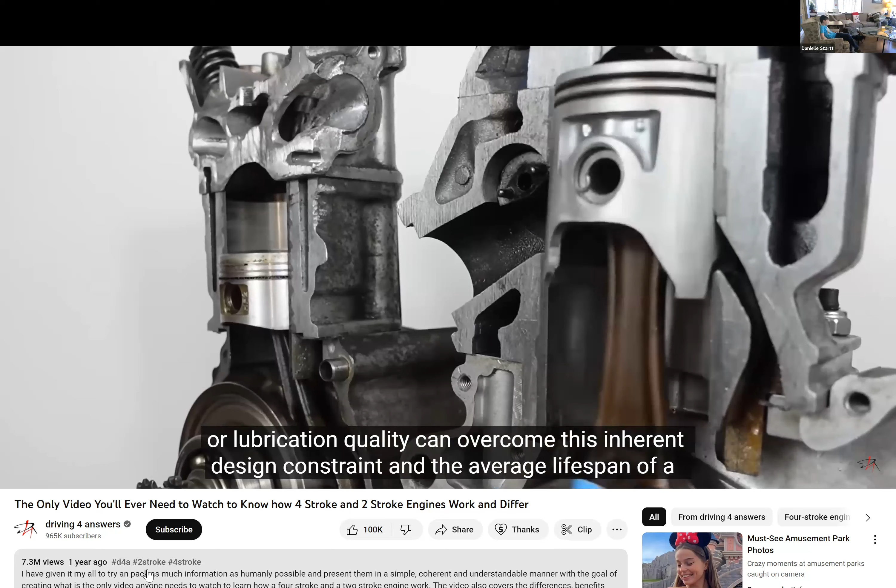This means that the lubrication of the rotating assembly of a two-stroke isn't nearly as consistent or reliable as a four-stroke engine, which ultimately leads to a significantly shorter maximum potential lifespan for a two-stroke. No amount of maintenance or lubrication quality can overcome this inherent design constraint, and the average lifespan of a two-stroke engine on a motorcycle is somewhere around 15,000 to 20,000 kilometers. Some may do more than that, but many won't make it even that far and will need their pistons replaced and bottom ends rebuilt well before that.

Racing two-stroke motorcycles often need rebuilds after only 15 to 20 hours of operation. In contrast, four-stroke engines on motorcycles, even small ones, can make it to 50,000 kilometers. Some even get to 100,000 kilometers and beyond, whereas engines on cars and trucks regularly make it past 300,000 kilometers. Some even get up to 1 million.

The flip side of this is that although two-stroke engines require more frequent rebuilds, their rebuilds are usually much less expensive and far easier to perform. The other problem with a total loss lubrication system is that burning oil is obviously very bad for emissions, which is the key reason why many legislations around the world have outlawed the manufacture of street legal two-stroke vehicles and only allow off-road and competition two-stroke vehicles to be made and sold.

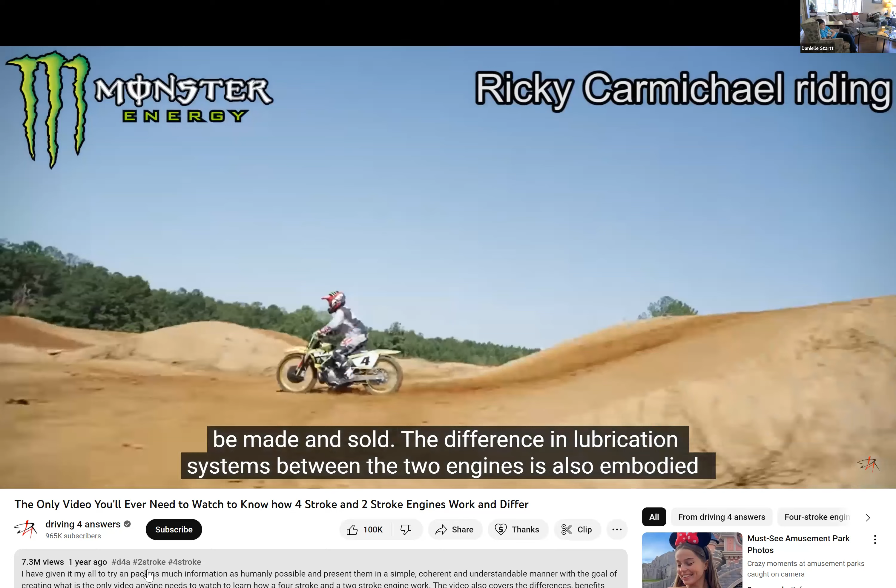The difference in lubrication systems between the two engines is also embodied and evident in the piston rings. The four-stroke has 3 rings, whereas the two-stroke only has 2. The third set of rings in a four-stroke are oil control rings, and they prevent oil from getting into the combustion chamber. Oil control rings are obviously unnecessary in a two-stroke because the oil gets into the combustion chamber anyway, with or without them. But there's a benefit for the two-stroke here because fewer rings means less friction and less power losses due to this friction.

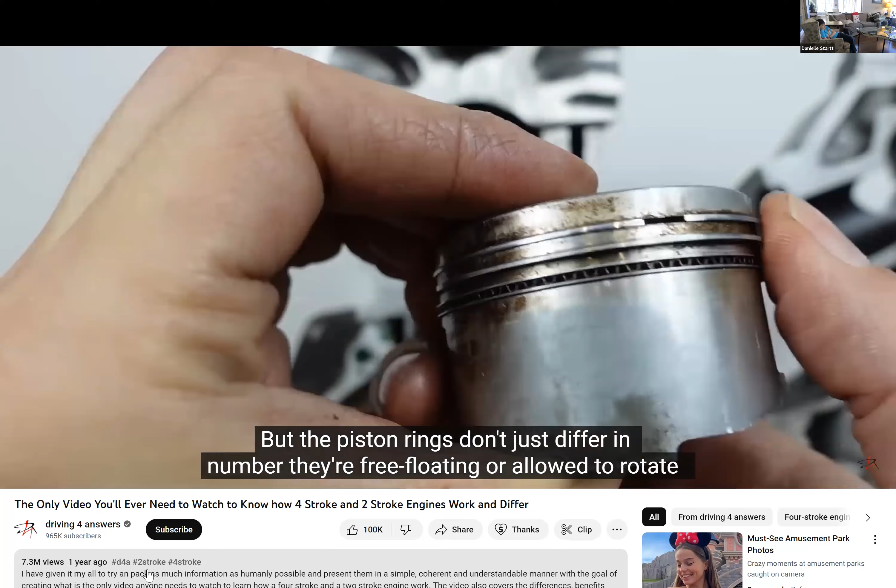But the piston rings don't just differ in number. They're free-floating or allowed to rotate in the four-stroke, whereas in the two-stroke they are pinned in place using split pegs. Now these pegs are missing from this particular piston, but you can still see the holes where the little pegs or locating pins go. Their purpose is to prevent two-stroke piston rings from rotating. This is done to prevent the piston ring ends or gaps from snagging onto the exhaust or the transfer ports, which would lead to engine failure.

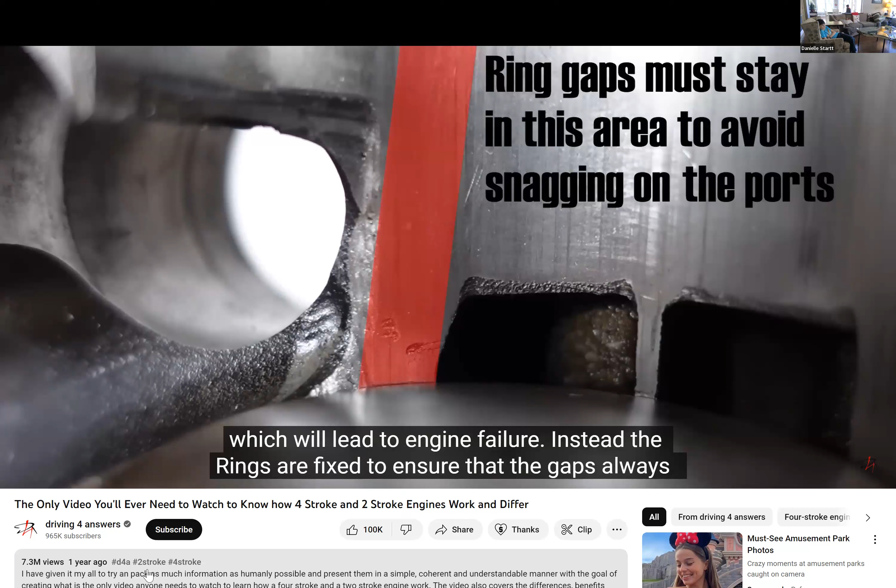Instead, the rings are fixed to ensure that the gaps always travel over the area between the transfer ports, eliminating the possibility of getting snagged by the ports. The free-floating ring system of the four-stroke is actually superior because allowing the rings to rotate helps ensure more even wear and a longer-lasting engine.

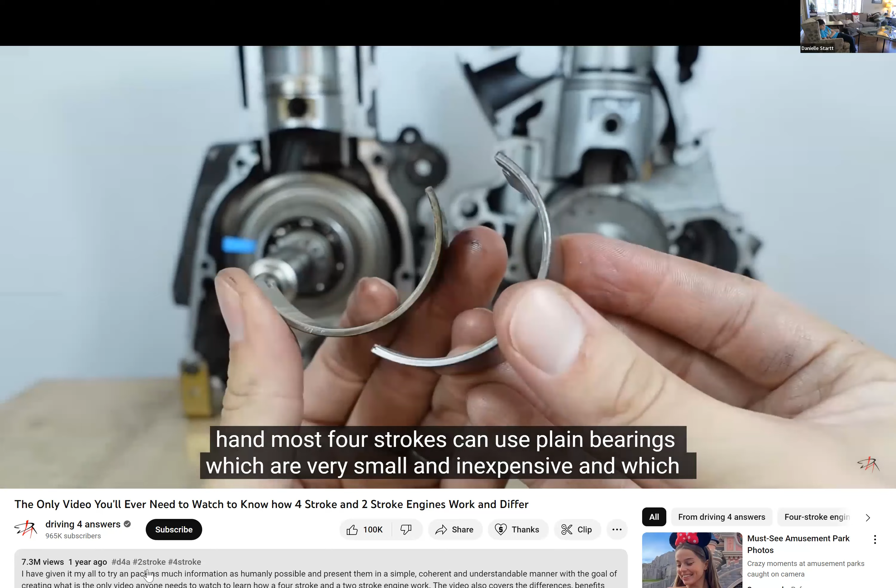The lack of consistent lubrication is also why two-stroke engines often use ball bearings and/or roller bearings as their rod and crank bearings. Ball bearings are more expensive and require more space than plain bearings, but they're far more resilient to poor lubrication environments. On the other hand, most four-strokes can use plain bearings, which are very small and inexpensive, and which together with a good film of oil offer excellent load bearing capacity and higher shock resistance.

But our example four-stroke engine actually uses ball bearings too. The reason is that this is a very compact and inexpensive engine, which has a very small oil pump that isn't able to provide the kind of lubrication that oil pumps on larger, more advanced four-strokes can.

Another area where two-strokes are limited is the compression ratio. The compression ratio of the engine is the ratio between the largest and the smallest volume of the cylinder, or the ratio between cylinder volumes when the piston is at bottom and top dead center. The higher this ratio, the more we compress the air-fuel mixture, leading to the air and fuel molecules being packed closer together, which then improves combustion speed and strength, leading to higher efficiency and power.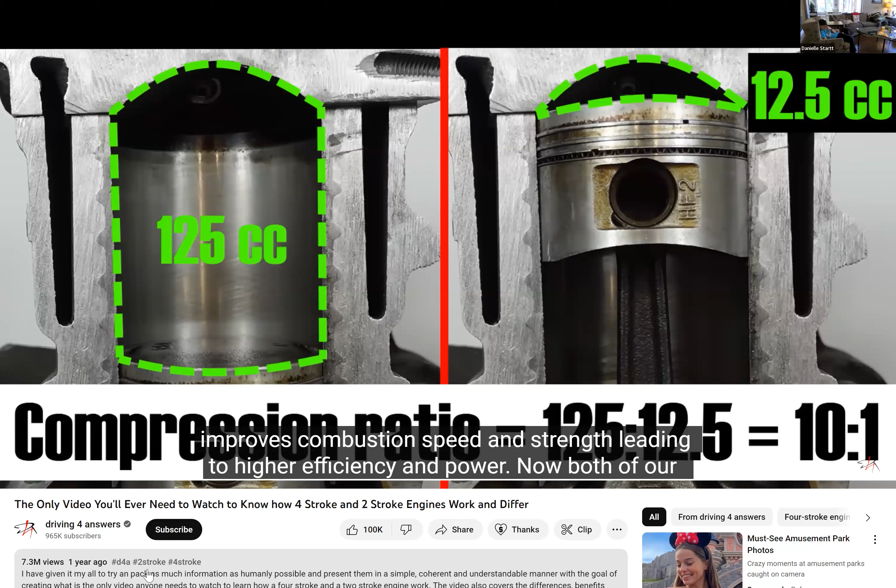Now, both of our demonstration engines are actually single-cylinder 125cc motorcycle engines. Our four-stroke is from a 90s Honda Spacy scooter. It makes 10 horsepower and 10 newton-meters of torque and has a bore of 52.4 millimeters and a stroke of 57.8 millimeters. Our two-stroke engine is from a Yamaha TZR Belgarda sports bike, also from the 90s. It makes an impressive 28 horsepower and a less impressive 16 newton-meters of torque, and has a bore of 56.4 and a stroke of 50 millimeters.

One of the reasons why the four-stroke engine looks very underpowered is because space constraints in a scooter lead to restricted intake and exhaust design. The other reason is that the scooter engine is focused on economy and user-friendly power, whereas the sport bike engine is focused on building peak power, which it manages to build and hold over only a very narrow part of the top of the power band.

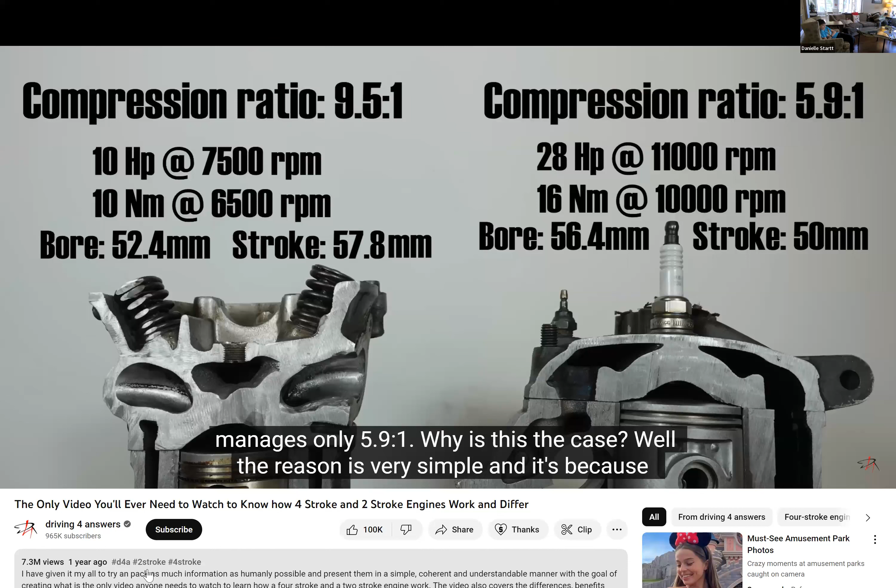Although both engines have similar bore and stroke specs, they have very different compression ratios. The four-stroke engine has a compression ratio of 9.5 to 1, whereas the two-stroke engine manages only 5.9 to 1. Why is this the case? Well, the reason is very simple: it's because the four-stroke utilizes the entire volume of the cylinder. Compression begins when the piston is at bottom dead center and ends when the piston reaches top dead center.

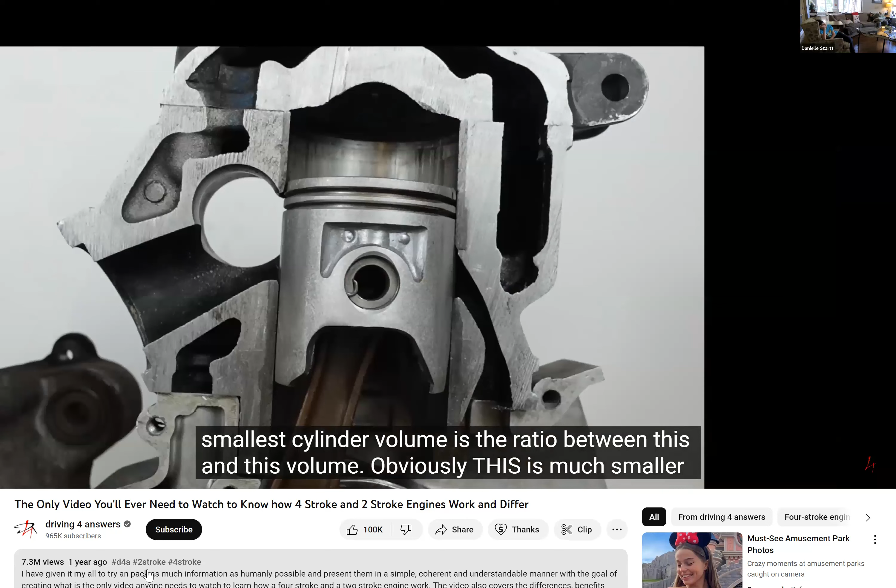Things are different in the two-stroke. Compression does not begin at bottom dead center. Instead, it only begins when the piston closes off the exhaust port. Before the exhaust port is closed off, the cylinder isn't sealed, and air and fuel can't be compressed. Instead, they're free to escape from the exhaust port. This is why in a two-stroke, the compression ratio, or the ratio between the largest and the smallest cylinder volume, is the ratio between this and this volume. Obviously this is much smaller, leading to a much lower compression ratio, which ultimately limits efficiency and performance in a two-stroke engine.

The final difference is that the four-stroke is inherently more flexible thanks to its more complex, bulkier design, and the key factor behind this lies in the camshaft. A camshaft is essentially the mechanical brain of the engine, and changing the camshaft can completely transform the character and performance of the engine. But you don't even need to change the camshaft—you can simply shift its angle in relation to the piston, known as advancing or retarding the camshaft timing. And this can be done while the engine is still running.

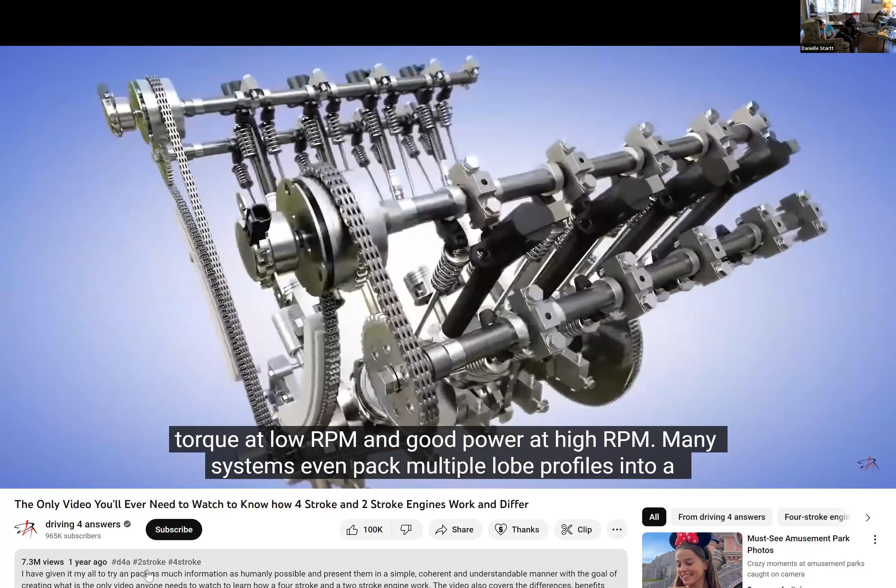Most modern engines on cars incorporate variable valve timing systems, which advance and retard camshafts as required to produce good responsiveness and torque at low RPM and good power at high RPM. Many systems even pack multiple lobe profiles into a single camshaft and can switch between them during engine operation, giving us low valve lift at low RPM and high valve lift at high RPM, which further improves responsiveness, power, and torque throughout the rev range.

In contrast to this, the two-stroke cannot change the position of its port. They are a fixed part of the engine's construction. So a two-stroke can only change the size of the exhaust port. And this finally brings us to the big round hole in the exhaust port. It's meant to house this.

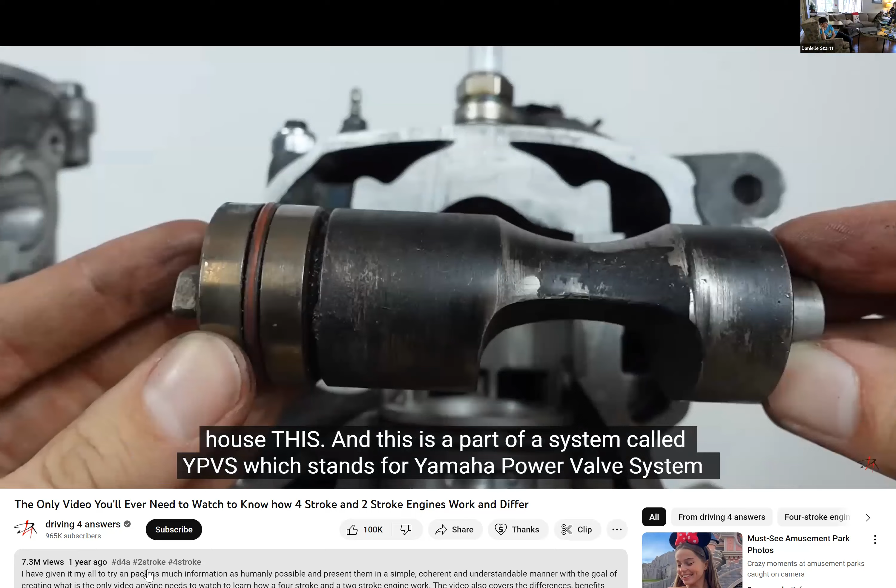This is a part of a system called YPVS, which stands for Yamaha Power Valve System. Other manufacturers also develop their own system with their own acronyms, but all these systems have the same goal. And despite what their name is, the goal isn't to increase power. Instead, the goal is to even out the power band of the two-stroke, resulting in a smoother, more usable, and more linear power band and power delivery.

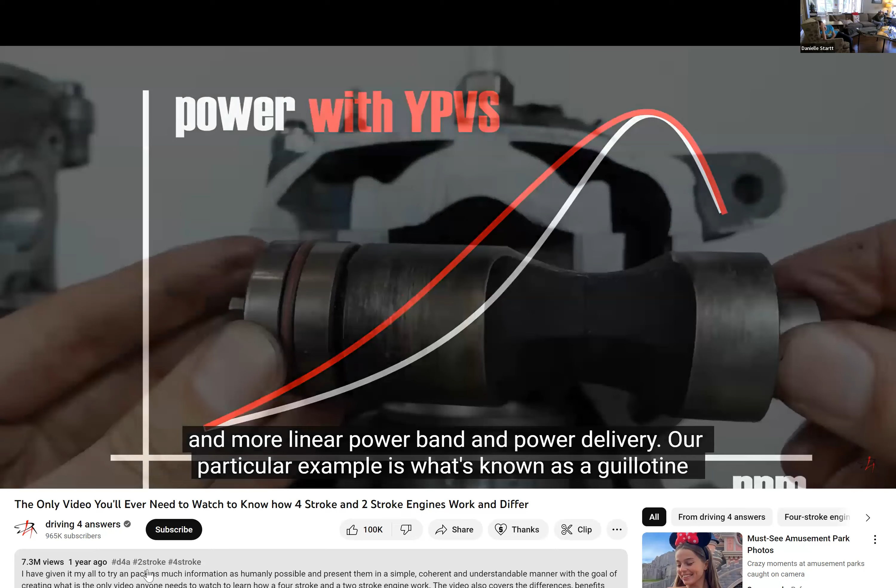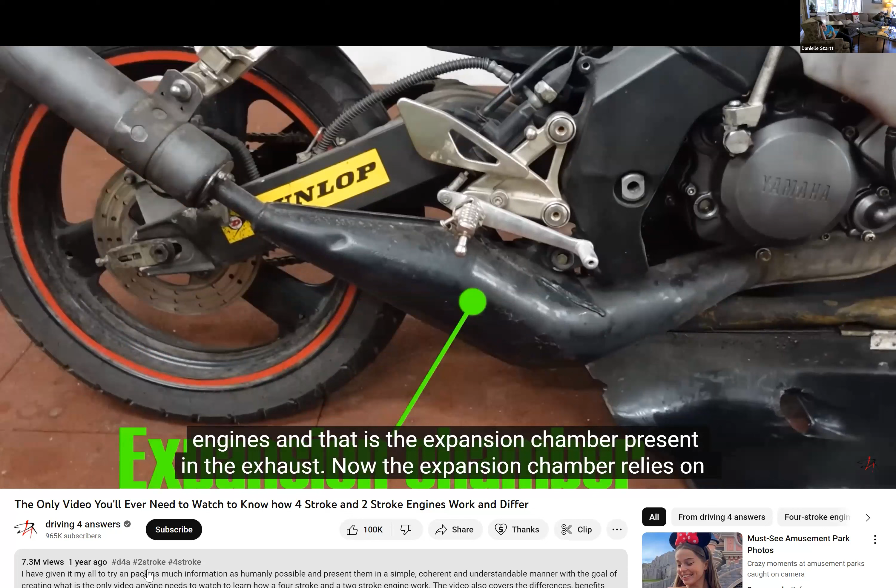Our particular example is what's known as a guillotine-style power valve, and it rotates to make the exhaust port smaller at low RPM and larger at high RPM. Now, the power valve works together with another signature feature of two-stroke engines, and that is the expansion chamber present in the exhaust. Now, the expansion chamber relies on the principle of wave resonance, which is similar to what you experience when your voice creates an echo.

When the initial acoustic wave of your voice encounters an obstacle, it gets reflected back as a delayed, weaker acoustic wave. The exhaust pulse coming out from the engine is also essentially a waveform. And when it encounters the change in diameter created by the expansion chamber, it reflects another waveform back to the cylinder. This waveform can then be designed to push back the fresh air-fuel mixture that's trying to escape through the exhaust port.

Now, at low RPM, the piston is moving slowly, and this means that the reflected wave from the expansion chamber can easily make it in time to push the fresh air-fuel mixture back into the cylinder. This is why we don't need the entirety of the exhaust port and can reduce its size. The benefit of the reduced exhaust port size is that during combustion, we keep the cylinder sealed away longer, which means that we can harness more of the combustion's energy, which results in better responsiveness and torque at low RPM.

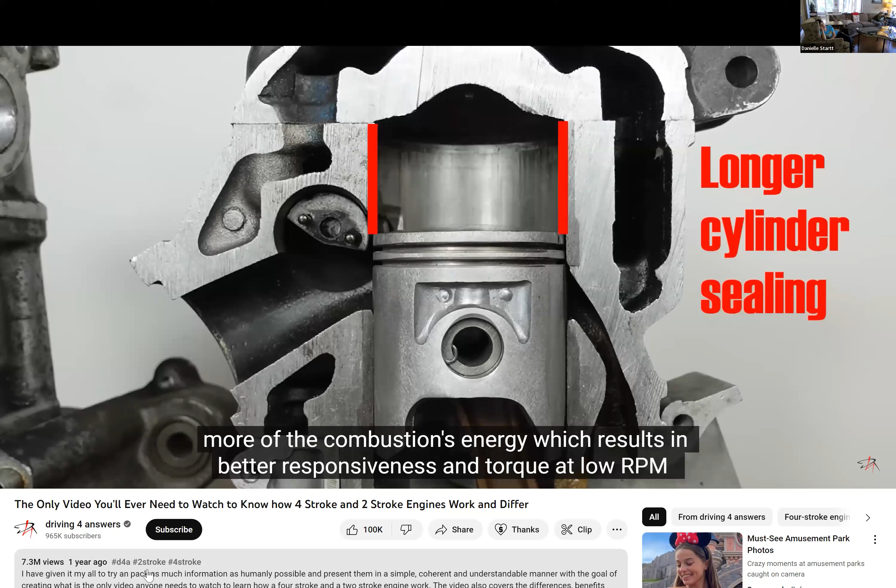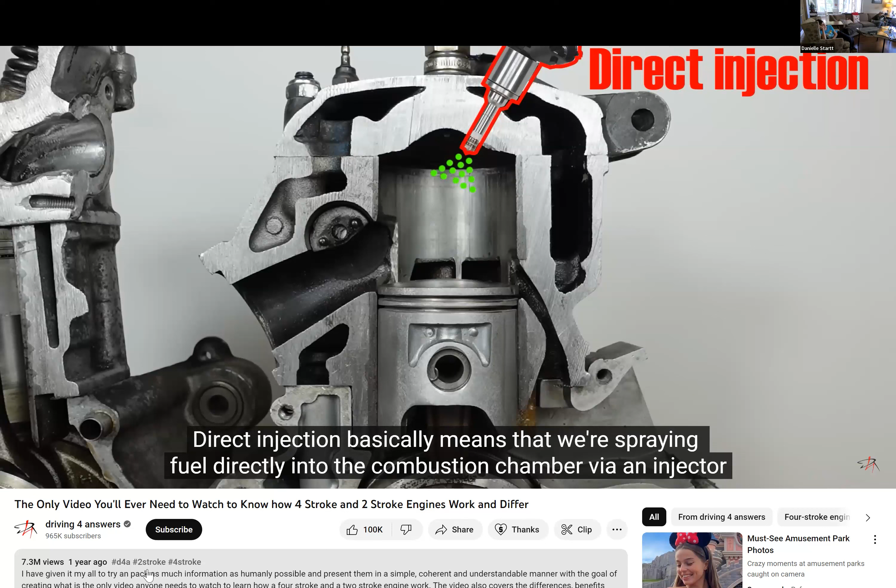So it seems that reduced lifespan together with high emissions and poor efficiency spell trouble for the two-stroke. Well, there's a glimmer of hope in the future of two-strokes, and it comes in the form of direct injection. Direct injection basically means that we're spraying fuel directly into the combustion chamber via an injector, instead of bringing it in from the intake port via a carburetor.

Direct injection also has benefits for four-stroke engines, and many modern four-stroke engines in cars feature direct injection. But the benefits of direct injection are more significant in the case of two-strokes. By spraying fuel directly into the chamber, we can start introducing the fuel only when the exhaust port gets closed off by the piston and compression action begins.

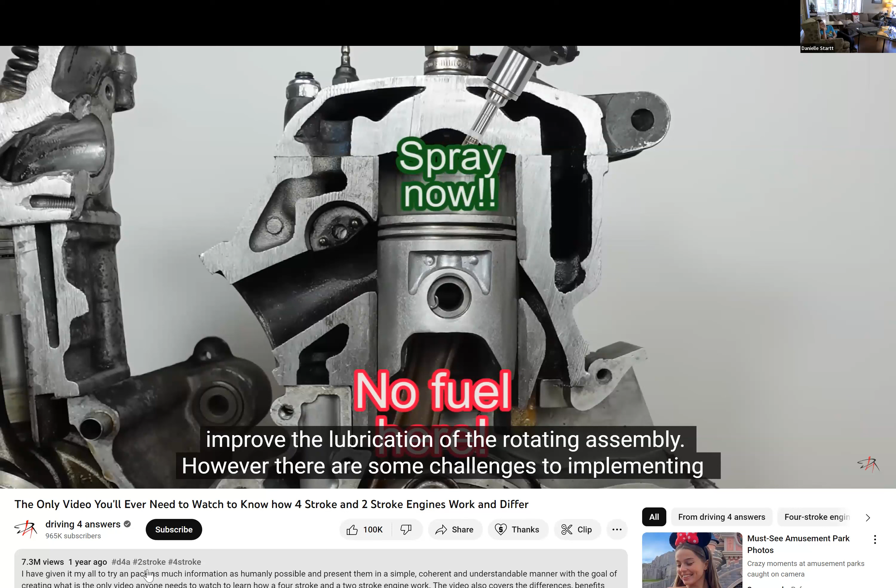This prevents fresh fuel from being dumped out the exhaust port, which obviously dramatically improves efficiency and emissions. It also removes the solvent properties of fuel from under the piston, which can help improve the lubrication of the rotating assembly. However, there are some challenges to implementing this technology, and it's still in the development stage. Only time will tell if and when it will become a mass production reality.

And there you have it, two seemingly similar but actually very different types of engines, each with its own benefits and drawbacks, which I hope this video managed to explain in an understandable and illustrative manner. As always, thanks a lot for watching.